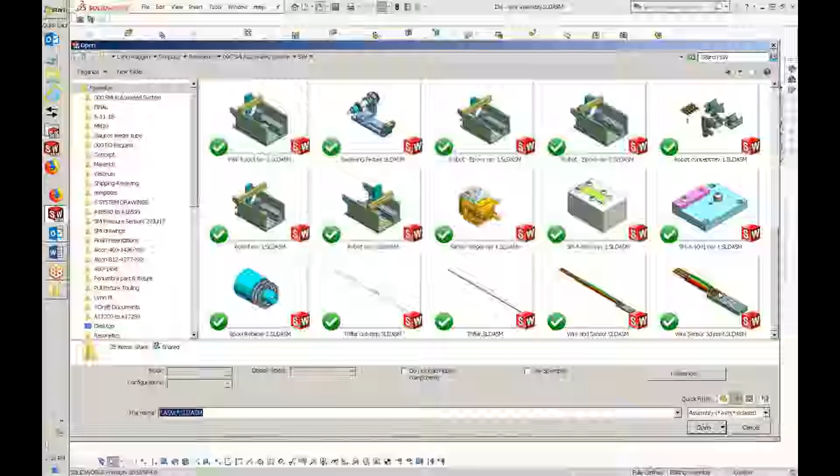How you doing? Oh, just marvelous. We're being paid. Yeah, I've got this on record, so let me get, I'm just trying to get Chris Robinson on the phone, but unfortunately I've got like no service. I don't know if I can go stand outside.

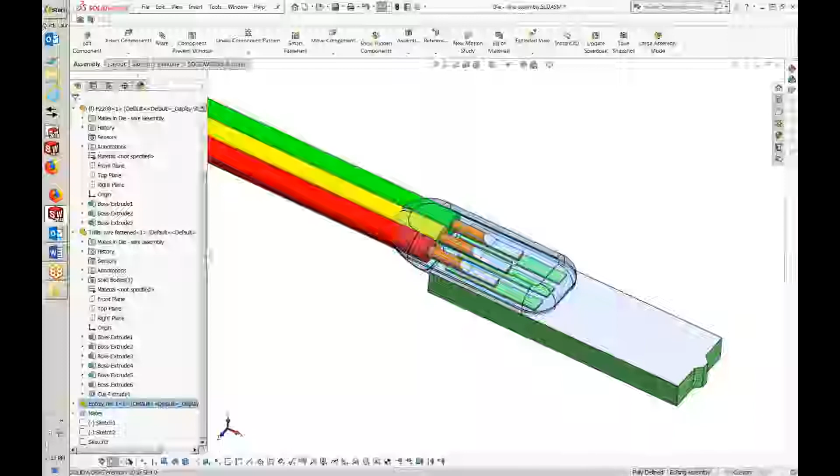Just locked himself out. Oh, yeah. Oh, he went out in the lobby.

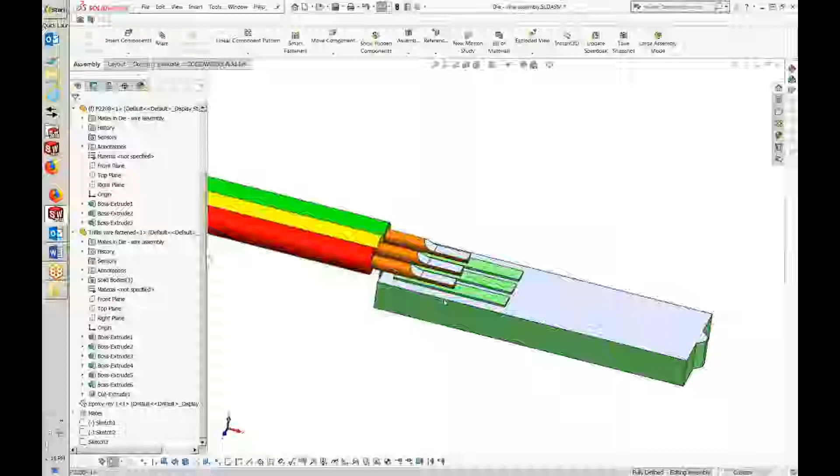Hopefully I can describe what we need, what we have, what works, what we can do, and what I need you to do. I'm guessing most of you have seen the product, which is what I have on my screen right here. This is the silicon sensor with the platinum bond pads.

That is 220 microns wide across there. The 48 gauge wire is 32 microns in diameter. So we have the trifilar wire that we need to laser strip, cut, bond, and then encapsulate that with the epoxy, and then, of course, cure the epoxy.

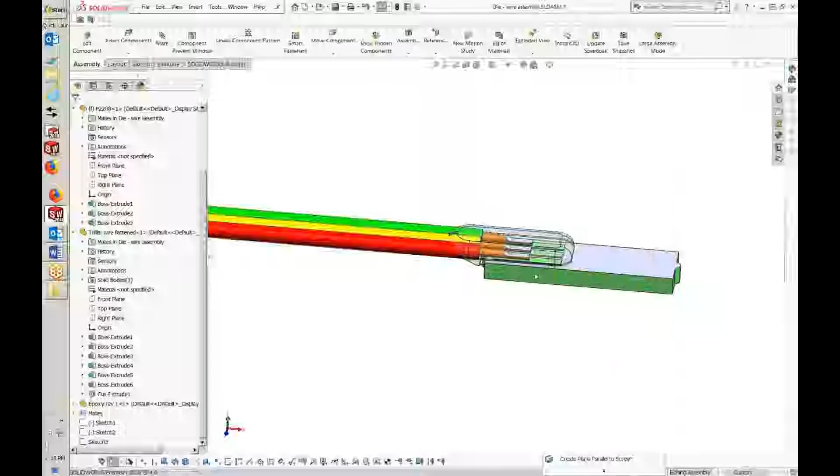After bonding to the sensor, before we do the epoxy apply, we need to do a cleaning operation. The best that I've come up with so far, and I still have research to do, is to take a laser and just lightly clean the area that's going to be bonded. Occasionally there's some organics that get on this part. I've tried different cleaning methods, but it is so small that if we use any liquid, that becomes a problem.

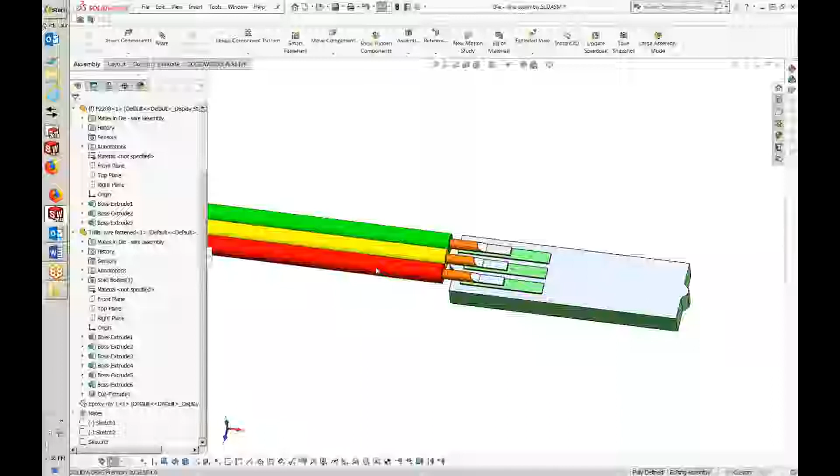Because you have to make sure that you get rid of that liquid before you put the epoxy on. It is a polyurethane 180 insulation on the wires, and this is about 3/4 of a millimeter long. It is 0.003 of an inch thick, or 70 microns.

Now, if I go to the wire itself, imagine that a wire is being paid off on the right side, it comes from a spool, goes through my tooling, which I will show you. Then in the laser stripping and cutting area, it's held and secured on the right side and on the left side, and this portion spans across the laser working area.

So from the bottom and the top, I strip that wire. This is somewhat optional, but currently what I do is I strip the 10 millimeters, then I cut the wire, and then I come back and strip this 0.2 millimeters, or 200 microns, of wire. The reason I do that is it tends to keep this more clean rather than stripping the whole thing and then doing the cutting. If I do that, it tends to have a little bit more debris on that wire.

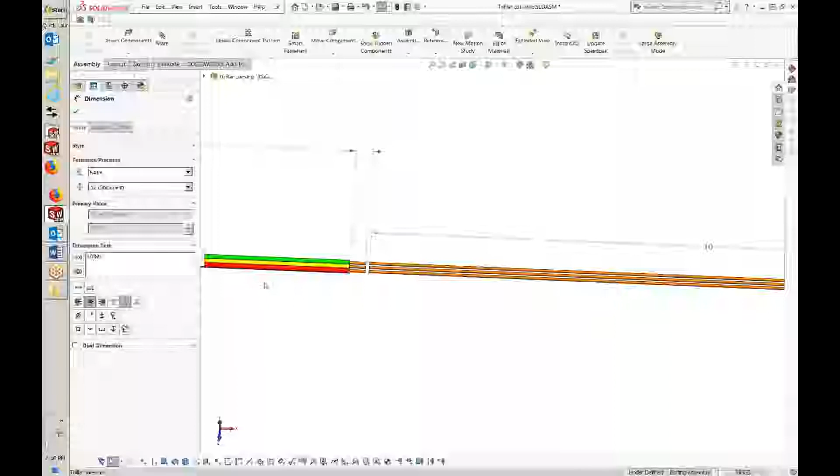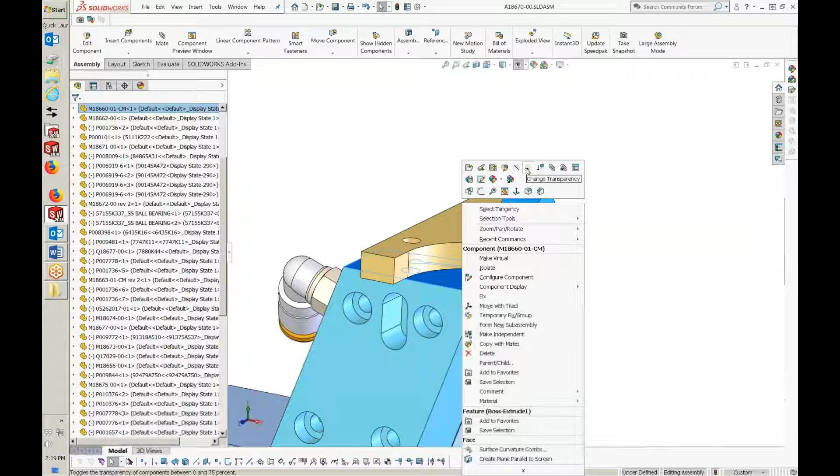My current tooling has a flipper on the top that I close, but let me change the transparency here, and you can see that I have a ported area, and I'm pulling vacuum, which holds that wire down. Now, the wire is obviously a lot longer than what I have shown here. What I'm currently doing is on this area here, I have ported argon gas. So once I strip this end, it is encapsulated with argon before I bond it to that sensor.

Now, let me go to the system, and I'll show you our current system now. I think maybe some or all have seen the video that Steve has taken when he was here.

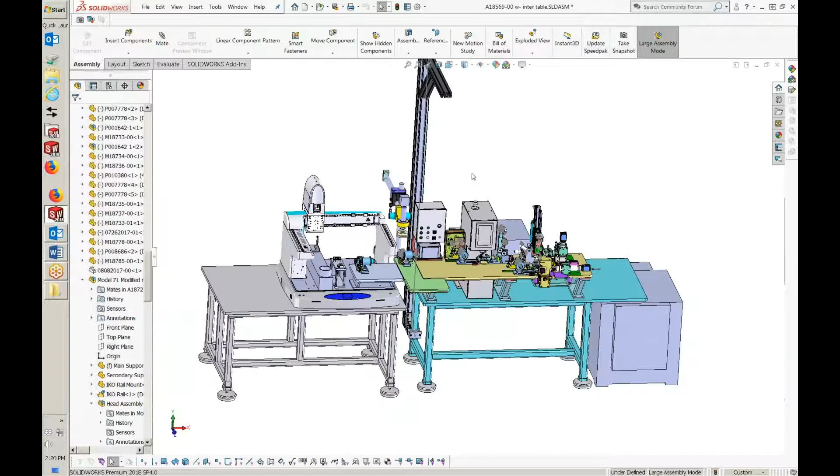Our current system consists of the laser, and I show the carrier in multiple locations. We actually have 2 carriers. I have an umbilical cord that hangs from the top, and that carries vacuum and argon to each of the 2 carriers. I have my laser station here.

Let me bring up my despooling method. This is my supply spool here. Now, I'm currently in the process, wait a minute, I don't have, let me back out here. Don't have that.

Steve, this is a little bit different than what you saw. And yeah, a little bit.

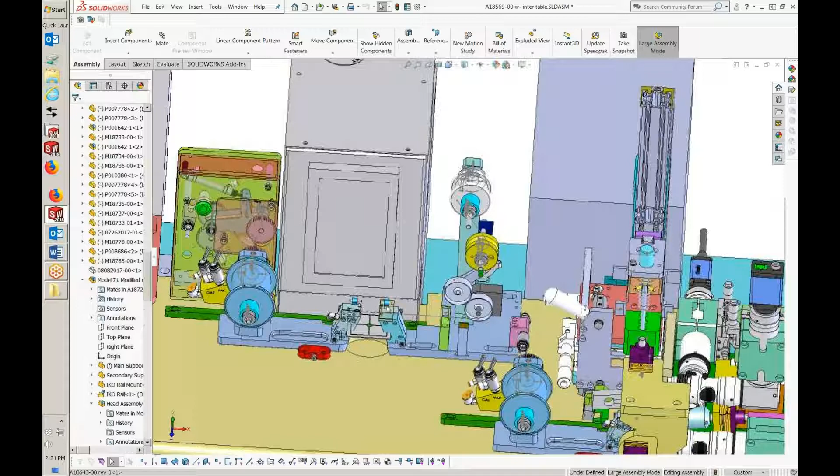What we currently do, we pay off the material, go through this V-shaped spool, and that is positioned down in line with this unit right here. The operator is responsible to flip those lids open, carry that wire through, close the lids, and there's vacuum that holds it in that channel, and then pull it to a given point, secure it to the spool, and then the spool winds X number of times depending on how we have it programmed to get the right length.

What I have in the works is, let me change my view for just a minute, makes it a little clearer. Okay, what I have here is I'm paying off my spool, I'm coming around here, and then I have a pinch roller and an encoder wheel.

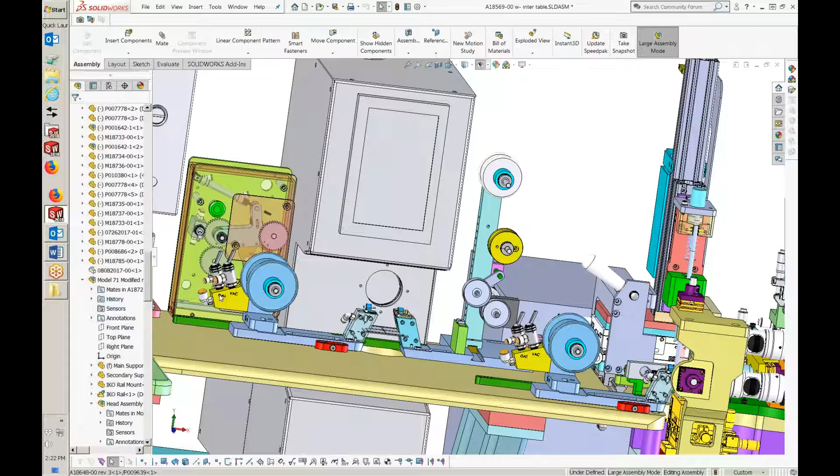So what I'm going to do in the future is measure my incoming material to this process rather than the outgoing material. So once I secure it to that spool, I'll still wrap my right number of turns, but I'm actually measuring the incoming material, so it's not dependent on the operator pulling it to a given point and securing it to that spool. That's a minor change, but something we have in the works, and I think it's going to be a much better approach in the future.

Here I simply have a wire guide that tends to guide it as I open this lid, manually grab that wire and pull it through.

Now, one of the things I want to talk about when we get into the automated system, right now, like I mentioned, the operator is picking up that wire, carrying it through, and securing it to that spool. I'm quite optimistic, but I'm open to whatever you guys think too, to use a robot to pick that up.

Keep in mind, these carriers can certainly change in configuration. This spool could be above or below this incoming wire. It could be positioned vertical. So just keep in mind there are other design options as we go to the automated system. But I think that we could use a robot to pull that wire.

The one thing I'm not as confident of, and I hope we can maybe work through an automated way to apply tape. Currently, our customer prefers taping the wire to that spool. It then wraps up, and then once we're done, we end up taping the other end to the spool as well, and we ship the spool and the product to our customer.

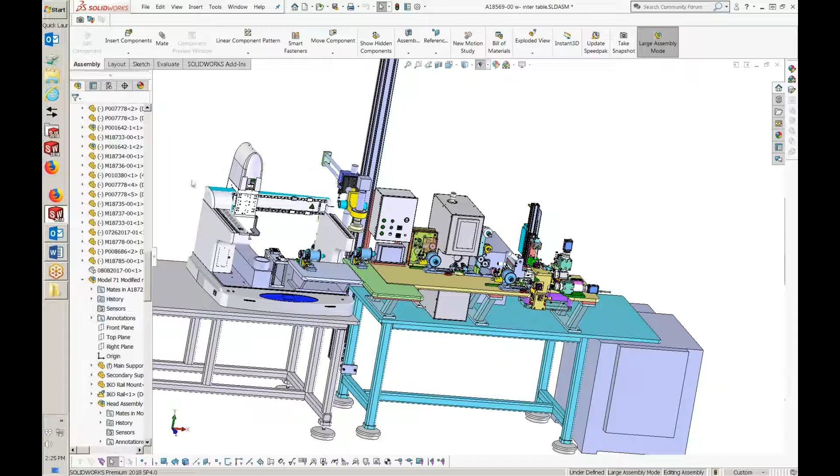So that's my laser stripping method, and I have the wire then wrapped on the spool and extending a short amount off to the right end of this carrier. While that's occurring, this is an Air-Vac system. I don't know if you guys are familiar with the brand Air-Vac. We bought that as a demo unit, and it included, I don't have all the details shown in this view, but it included the pick and place unit and the epoxy dispense unit.

I have added this tooling, and what we're doing at this point is picking and placing, or picking from a gel pack. Each gel pack has 100 parts on it, and that is different than what we're going to do on the automated system. The automated system needs to have a wafer feeder and will feed directly from the wafer. Currently, our customer is picking from the wafer, doing inspection on these parts, and then shipping the parts to us on that gel pack.

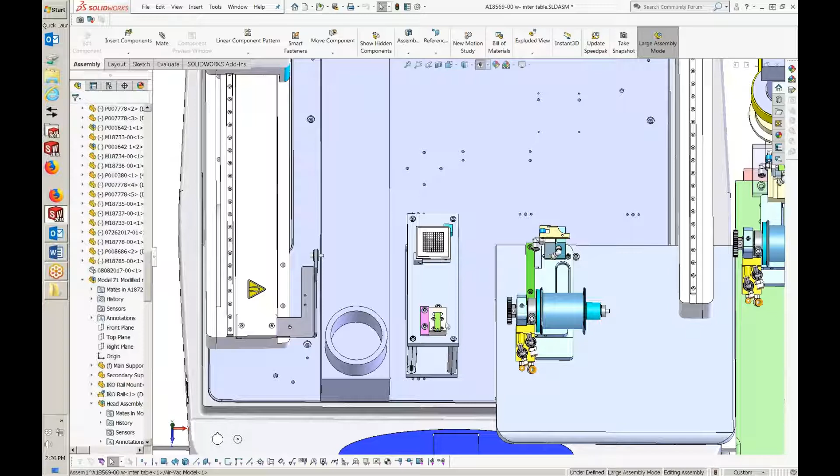I take one part at a time from that gel pack and put it into this movable fixture block for my sensor. So this portion here, I moved between the pick and place unit. I actually have two of those. Let me back out here a minute. And over here in the bonding station, I have another one of those. So I'm bonding a part here while I'm loading a new sensor to the fixture block here.

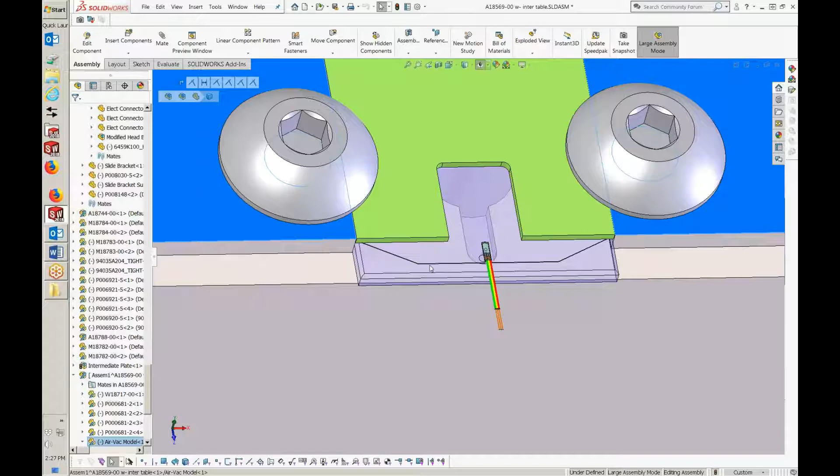And this fixture block is simply a machined piece of aluminum. This piece here that is shown transparent is a 20 thousandths gauge block. I then have laser drilled a hole through that 20 thousandths gauge block. That is in turn open to a pocket in the aluminum to draw vacuum. You can see that I have a small vacuum hole that's pulling that sensor down. That's about a 6 thou hole.

So imagine the wire is not there. I simply have the sensor now in this pocket. What I have on top of that gauge block is a 2 thousandths piece of shim stock. I have laser machined the opening in that, so it's a slip fit for that sensor to drop it in that opening. It doesn't need to be absolutely exact, it just needs to hold it in position. In turn, I just simply have a hold down on the top of that, another piece of shim stock, and then I have it all encapsulated in that block.

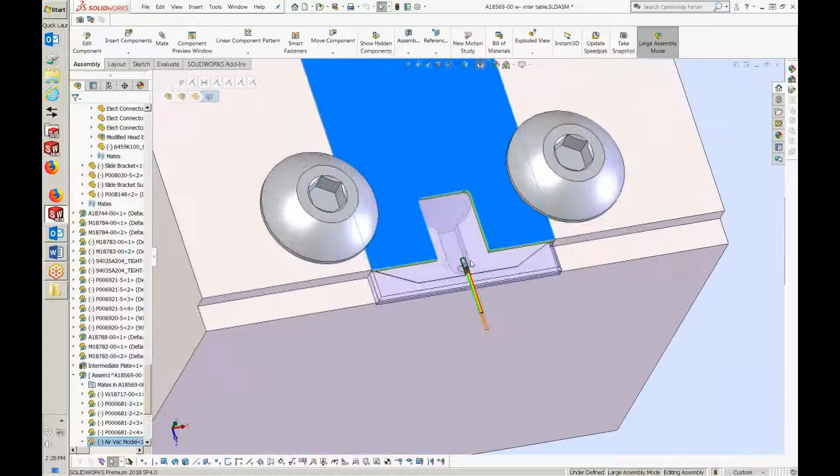Keep in mind that as we move toward the automated system, the physical outside dimensions can all change. I think this works quite well. And keep in mind too that we have worked enough with this. I know what works. I know what we can do. I think it all makes sense if we provide the part contact tooling, or we can talk about that. So this is picking and placing a sensor in that location while I'm doing my laser stripping. Let me move over here to the bonding area.

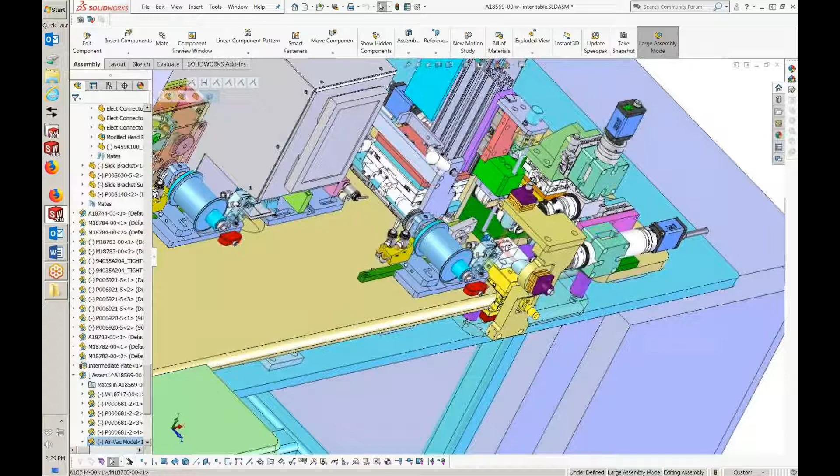When I move this carrier into position, I have a guide block over here and I have a dowel pin that holds it in a given position. The operator is responsible to push it into that position, and then I have a vacuum pocket on the bottom that turns on and holds that securely. I have the same vacuum source over here at this station, so once you move it into position, that vacuum holds it down and it does a very good job of securing it.

When I move this sensor carrier block from the pick and place unit to the bonding area, it again has a vacuum source and it holds the block down and continues to hold that sensor.

Ed, I'm sorry, Lynn, can I interrupt you for just one second? You're showing all the cameras in that view as well. Is the red path the field of view? Say it one more time. You show some cameras, and it looks like you're kind of projecting light and a field of view. Is that what the red path, the pink path is? It is. Okay, I wanted Brian to see that. He's our vision expert. I wanted him to see that you're looking at that from 3 different directions. Yep, I can see what you're doing.

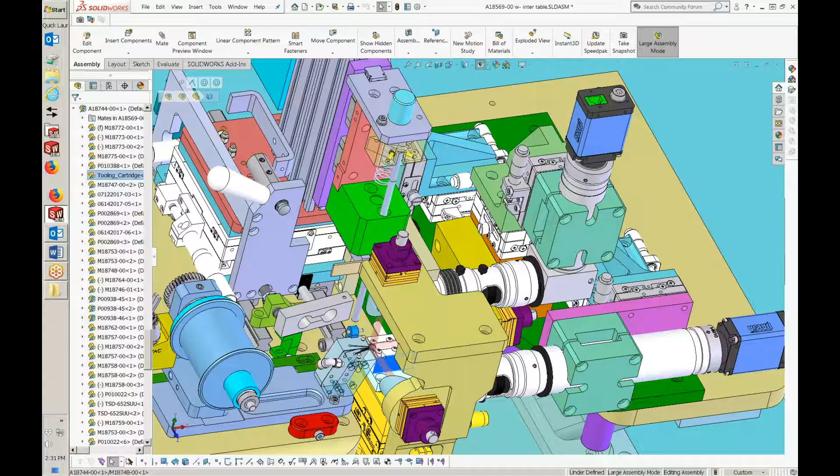And by the way, that sensor, as I put it in the end of that block and I carry that block from the other station back to this station, I have not had any problem with that part staying there. I've even dropped a block on the floor and it is a rubber pad and the part did not come out. The only thing that knocks that out very easily: there's a pocket in the bottom of this that I use for vacuum. If you set that block onto a flat plate, there's a little bit of airflow up through that hole and it'll blow that sensor completely out of there. Just setting it down. Simple hydraulics. Yes, yes.

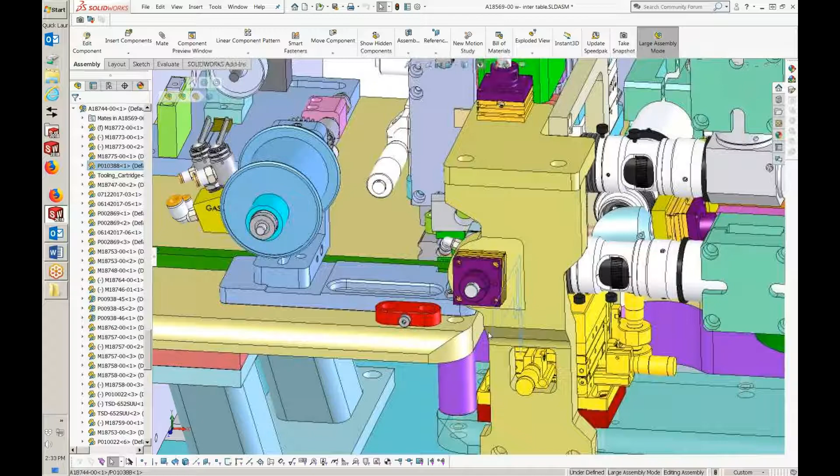What I have here is XYZ Thorlabs stages. So I can adjust that up, and X and Y here to move. In this scenario, I'm bringing the wire into a given fixed position because I've had the same locators on my carrier over in the laser area. I now bring it over here, so that wire runs very consistent as far as the location. The position of the sensor in the block varies a little bit, and I always bring it in with this down, so I don't hit it when I bring in the wire. And then I bring it up and align the sensor to the wire.

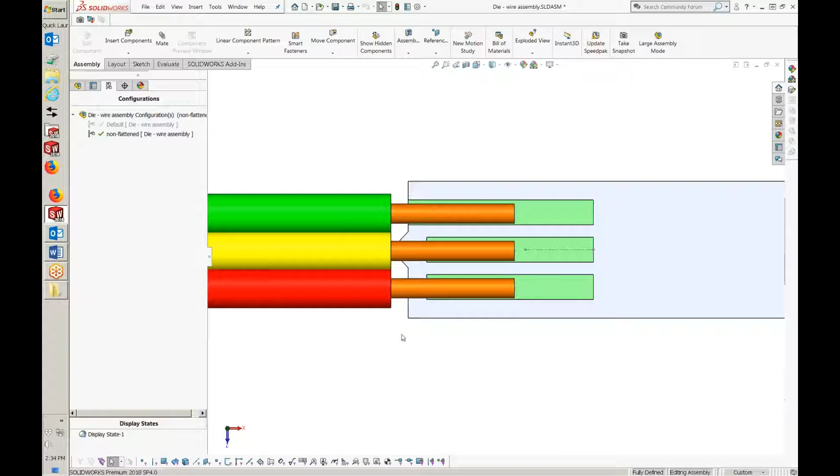Let me go back. So in my field of view from the top, I'm looking at that, and this part right now is shown 2 microns out of position. So you can see what that looks like at 2 microns out. And that is probably the most critical. I look at it also from the side with the camera, but that's where I simply bring the sensor up to the bottom of the wire. I also look in the end.

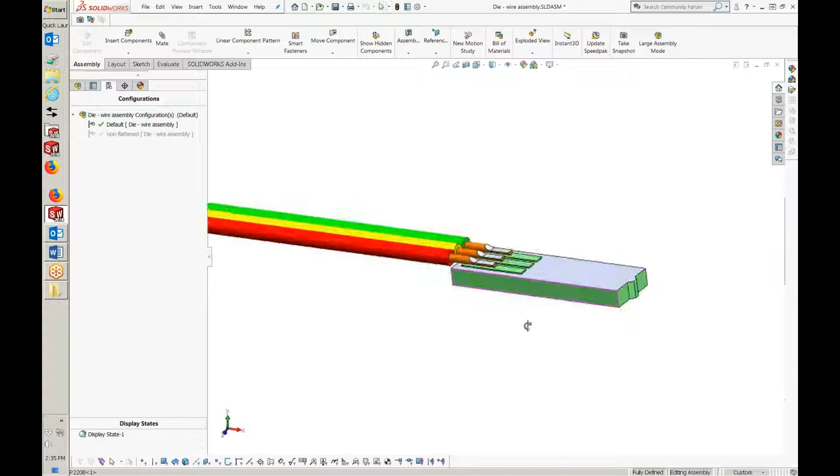The end I don't use very much for aligning the wire to the sensor. What I do use the other two a lot for is electrode alignment. When I bring the electrode in to do the bonding, I cannot see it from the top, because when I move that into position, I've blocked my top camera. So in this view is where I see the profile of that thermode. Also on the end. Now the thermode is considerably wider than that bond, so very seldom do I need to make an adjustment side to side. That usually is very good in its location. It's pretty much the same, but not quite as robust from the side here.

Because my wire is fixed on the location when I cut it in the laser, I bring it over to the same locator. It's typically very repeatable as far as where the end of that wire is and where my thermode is. So what I'm doing in my current scenario is adjusting the sensor up, down, back and forth, and in and out to get it aligned. But then the thermode is independent of that, but it seems to be very consistent with the wire.

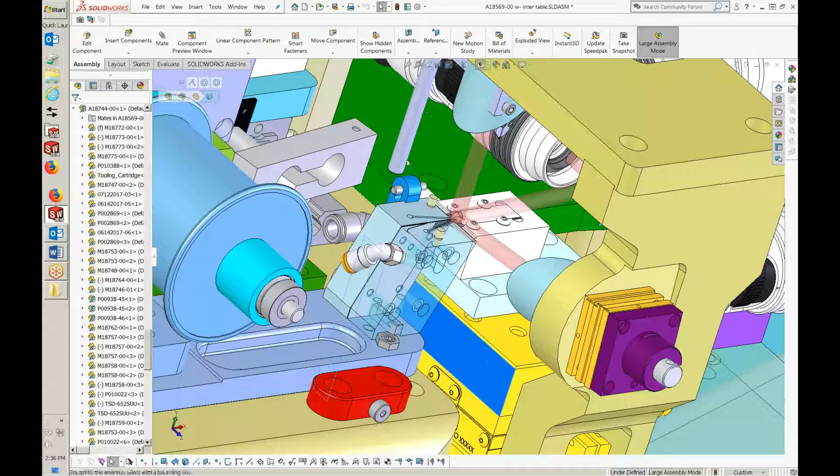Lynn, from a process question over here at EF, is that a heated base? I think the answer is no, but you tell me. That is no. It is not a heated base, and the bonder itself, it's a thermal compression bond, and I don't have all these views. They're not exactly the way they should be shown, but what I have tucked in all this bunch of stuff is a Miyachi bonder, and the Miyachi weld head or bonder head. I don't show the power supply, and the power supply seems to have worked out very well.

The actual thermode we have developed here at Resonetics. I was having trouble with that, and it's such a tiny bond, and we are bonding all three at the same time. I did some work on that. Anyway, I've come up with a very good electrode on the end of that. Now, it's not really an electrode, I call it that sometimes, but it's a thermode.

This is our assembly where we're doing the bond, where I'm bringing in the bonder. So this is on a slide so that the head is out of the way and I can see it from the top to do my XY alignment, wire to the sensor. I now bring this unit in, and I don't know if you're familiar with the Model 71 Miyachi head, but it's modified considerably, but that's what that is.

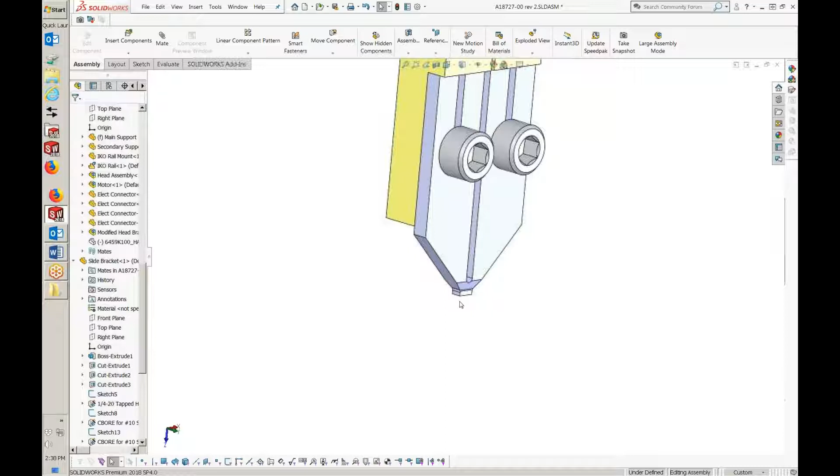Great. Lynn, is that a pulse tip, or are you storing the heat in the thermode and then bringing it down with no heat, allowing it to transfer? I bring it down with no heat, and when it comes down and does the bond, it's very similar to a resistance weld where it comes down. Yes, so it is a pulse tip. It'll be at stasis by the time the joint is made. Just so when it comes down, then it puts the heat in.

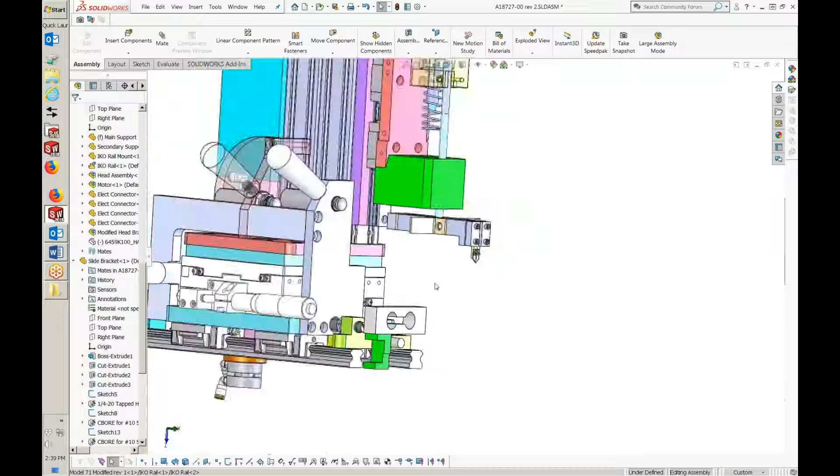One more time. So when you come down, you make the compression at about 10 grams, and then you energize. Is that what you're doing? That is correct. There is a switch that's not shown on this view, but there's a switch built into that Miyachi head. And when this unit comes on down by means of that servo motor, it makes that switch. It stops the downward motion because now it has preloaded that spring, and it triggers the electric circuit to run the current through that.

You can program in a delay, and then of course you program in the ramp up, the bond time, and the ramp down. 10 grams. That's the strain block right there. So they drive down until they see 10 grams before it stops? Yes, that's correct.

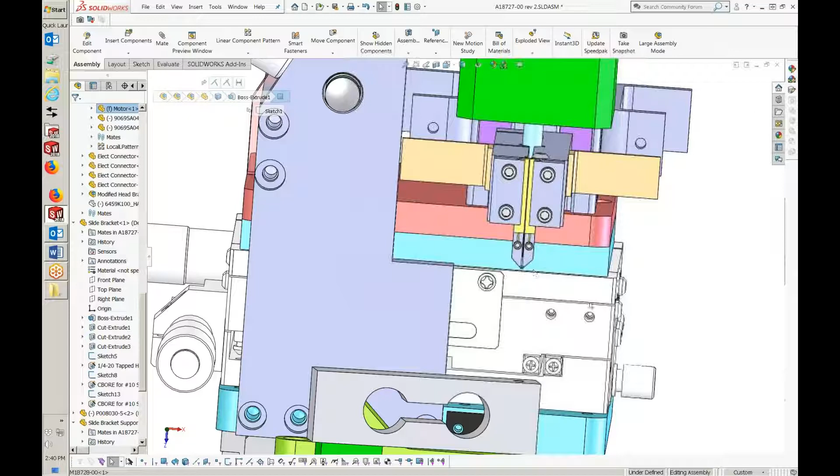Now, this portion down here is the Resonetics portion. We just bought these two slides, Thorlabs slides, which give us the adjustment side to side, so I can align that with the wire also in the other direction. I can align that, and again, that doesn't need adjustment very often. I have a handheld handle here and a push button here. That releases the lock, allowing this assembly to move forward and back.

Now, I have never liked this head very well, and here is the reason. And by the way, I'm running about 220 grams of force on that thermode. You can see with this design, and forget about this shaft up here, this comes up with two bearings up into this unit, and that is the means that guides this unit as it floats up and down. And then this spring in turn pushes this down, and you adjust that for the amount of force you want. With that cantilevered distance here, and because it is so small, any motion in this direction causes me problems.

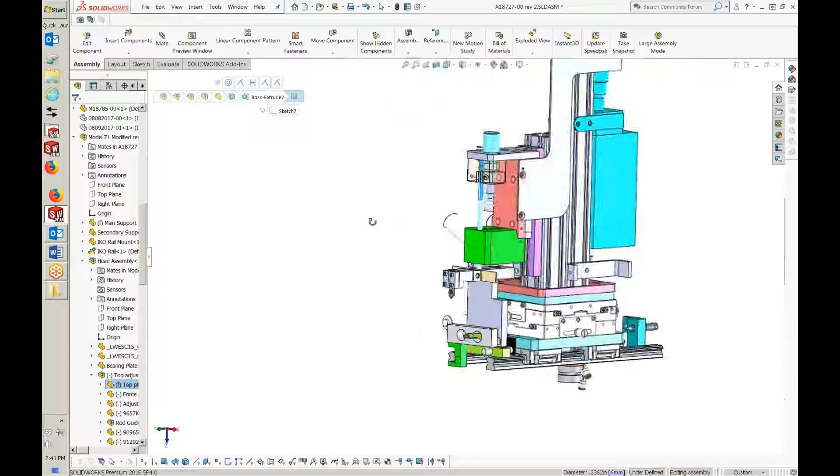So after I put this in operation, I actually ended up making a longer shaft for here. I put a couple bearings in here and preloaded it. So it still has free motion, but it tends to help as far as any cantilever motion that is moving out.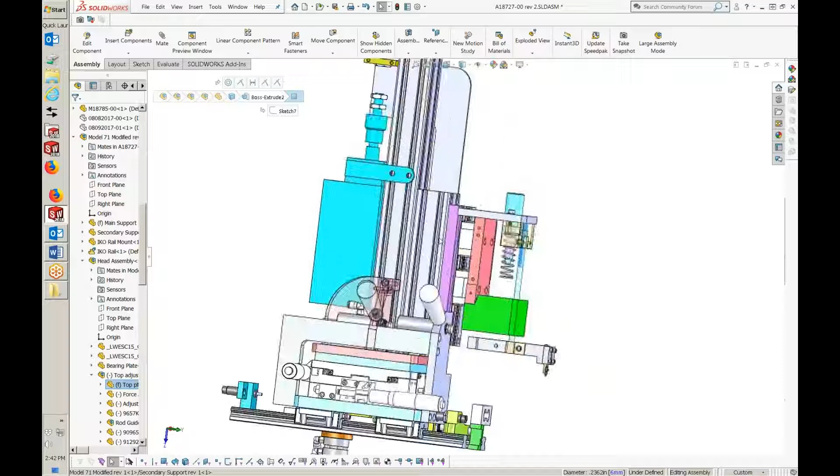The Miyachi, this Model 71, I don't think it was ever intended for something this small. And the way you adjust that is on the controller. You can adjust your post-stop or your pre-stop before the weld. So you bring that down to X distance above the part, and then you can come on down and do the weld. That is way too coarse, and I can't get to the exact position that I'd like to get to. So when I go forward, I don't want to use a Miyachi head. The power supply is perfectly fine. Haven't had a bit of trouble with that.

But the motion, all I really need to do is to come over and put a very consistent force on that part and make sure I don't move side to side, back or forward when I come down with that force. It needs to be very consistent on the top of that part. Once I'm down, I need to know that with a given force and then trigger the electrical circuit. So, any questions on what I'm doing there?

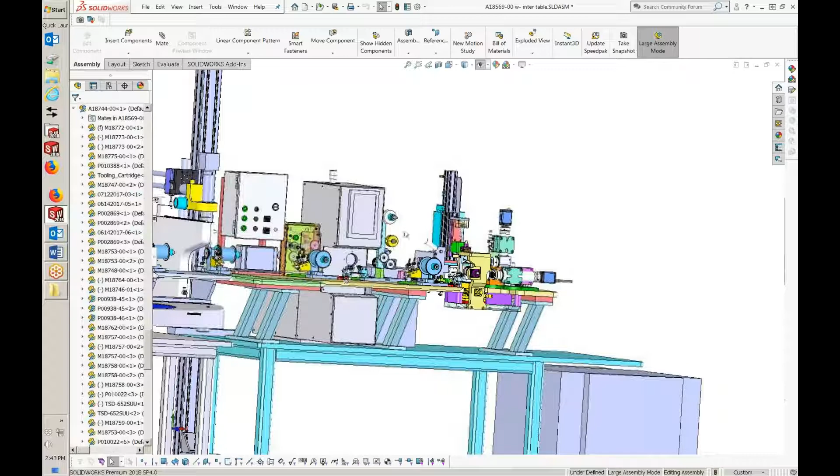Not yet. Have you thought about, instead of using shaft guidance on there, using cross rollers on the bond head? Instead of using what? Well, right now it looks like you got a shaft bearing out there. There is a linear bearing in here that came with the Miyachi unit, and that's what I'm using right now to guide that thing. I've thought about trying to go with something.

I'm a little concerned. It's a balance between, if I have much preload, that'll give me more rigidity, but it also provides less accuracy on the force because then you have to overcome the preloaded bearing. You get the weight of the carriage, which is going to work against you, but worse yet, on the bearings, you're going to get your stiffness, but you're going to get the stiction of the bearing, which will false read on your grams force. Huge.

And if we can work another way around this camera, all I want to do is put some force on there. So as long as I can get it into position and put a consistent force, I could even make a U-shaped bracket, something like that, some method that I can put the force directly over the bond. I think there's many ways that I could keep that accurately positioned.

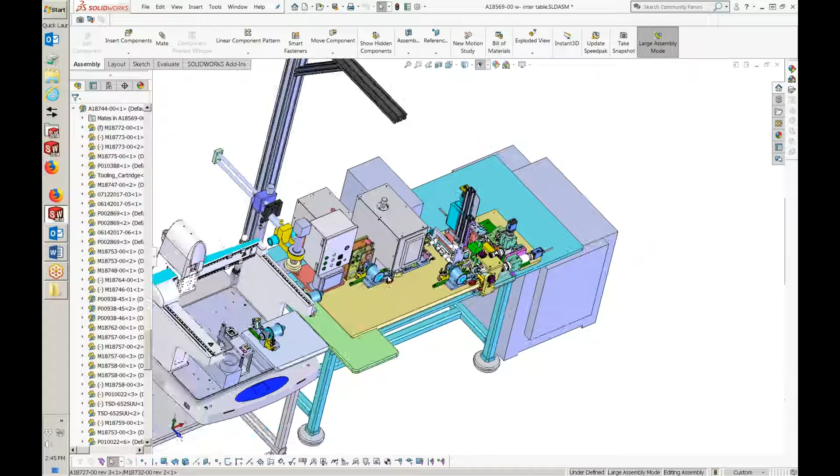Now, what I had them do is build in also a load cell on here so I can check my force anytime I want, simply move it back in the park position. Load cell. That's what I would recommend. And bring it down. If you want to make that as stiff as you need, what I'll do is tell the servo to stop at 230 grams of holding force, whatever it is.

Now, the last step, and what I have here is simply an inspection station. So whether it's cutting it off, bonding, or the epoxy station, I can bring it over here and snap an image, look at an image of my part. That was kind of an afterthought, and it worked out real well. I spread this apart and put this cable in here. It doesn't look the greatest, but it works functionally. And also you have these two carriers and they have an umbilical cord on, so you got to make sure they don't get tangled.

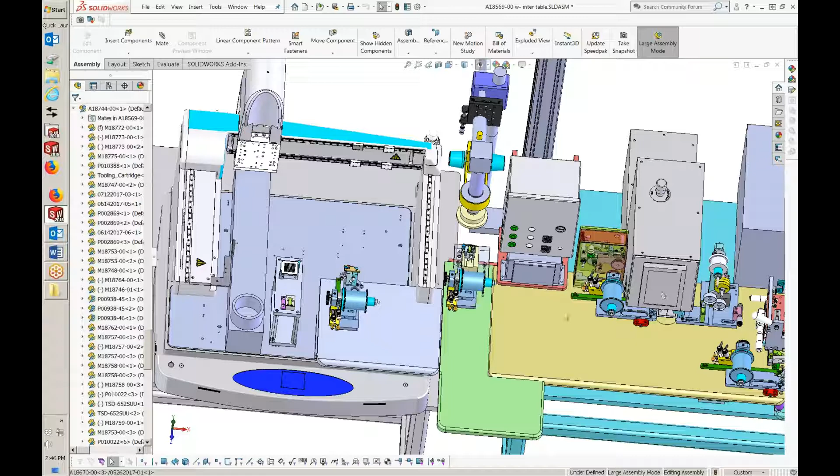Now, the last thing I do then is bring this over and dock it in the air vac station again. Again, vacuum holds that part down. And I don't have all the details shown in this view, but I bring that over and the head is equipped with a dispense nozzle. It looks at it first with the vision system to find it. It then brings it over and deposits the epoxy on that.

It then brings the camera back and looks at it a second time. It then moves, and what we've added to this air vac system, and again, I don't show the detail in this view, is a UV light guide that I have mounted on that, and it comes over and does the curing.

Once that is cured, I again look and do a final inspection on that part, and then I'm complete. I take that spool off of that curing. The product is the part rolled up on the spool, the little tooth tape holding it. Well, you saw that. I brought that in.

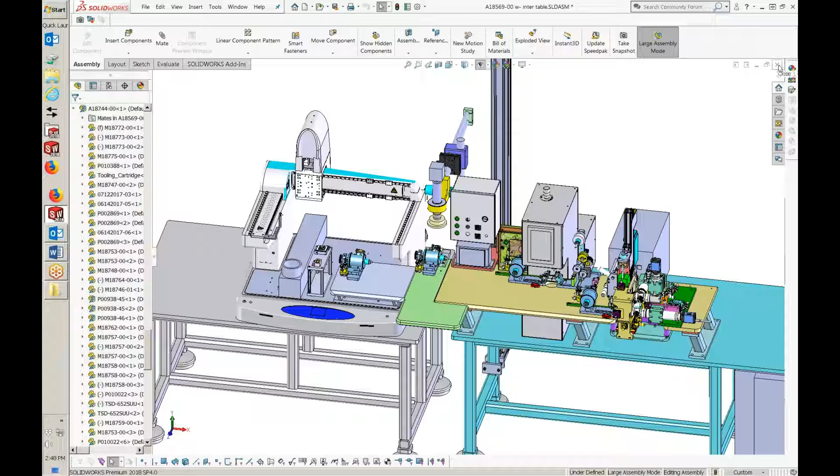Now, that is the semi-automated system, and the customer would like to go to a fully automated system. They do expect production rates to go up considerably. So let me bring up some concepts on that. Close this out because that is a big file.

I've got several concepts that I've worked with, some as an index dial type system. The one that I think will make the most sense is maybe a robot to move the carrier around from station to station.

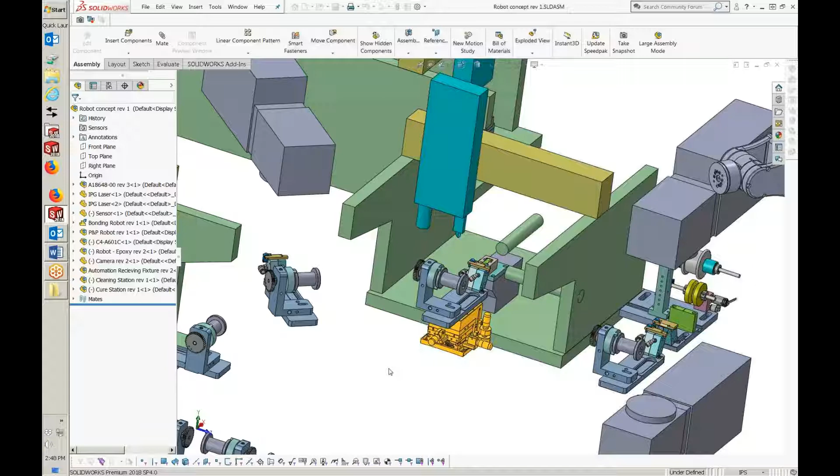And I'm going to stay on the line, but I'm going to go get me some water if you don't mind. I ran out of water. Oh, feel free. I'm doing a lot of talking here. Excuse me. Okay, I'm back.

Okay, what I have shown here is my incoming spool dispenser and my carrier. And again, keep in mind that this can change configuration. So if I could use a robot, would be great. Pull that wire through there and get it secured to that spool. I realize that maybe to start out, or if everybody is not comfortable with doing that automatically as far as taping that, I may have to have an operator interface there.

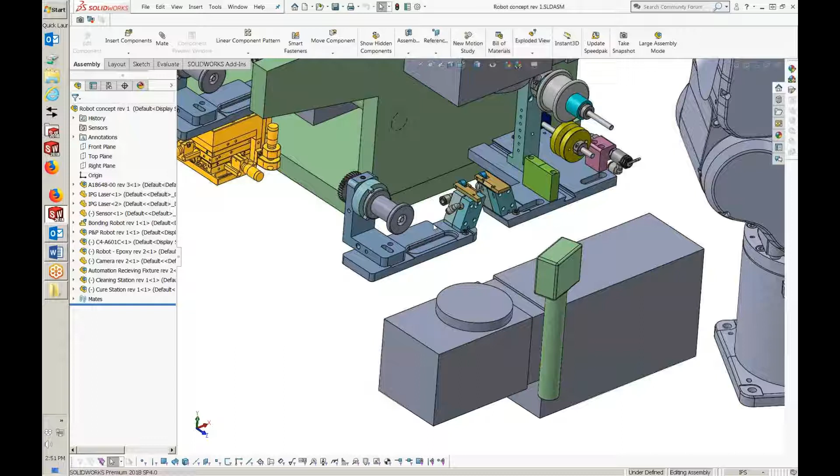A good alternative. You sent a lot of information over, and I know they're digesting. They're going to get back to us and see if we've got some other way to streamline that as well. But yeah, for now, we'll just think of it as a laser stripping station, not with any particular brand on it. Okay. You're showing it as a dual galvo system, top and bottom, correct? I am, and that's what we have now, except that it's got a beam splitter. It's one source. Okay. So just consider that a laser. So yeah, we have a laser in it.

Now, as far as our current experience, when I dock my carrier, it does seem to be very repeatable. I'm guiding it along one edge and then coming to a stop on the front face of this area right here. And then the bottom side of these is hollowed out somewhat, so when I pull vacuum, I got plenty of surface area to pull vacuum on that. I'm not saying that's the way we have to do it, but that's the way we do it now.

Right now, we have a spool retainer over here that I simply stick on this side of that spool. It'd be nice maybe if I can stick that spool on, and maybe there's something that grips it on this side and leaves this exposed, but that's details further down. So kind of my thought here, and I'm open to a lot of different ideas, but if we could use a robot in here to move these around, we dock this here, and we have several of these carriers.

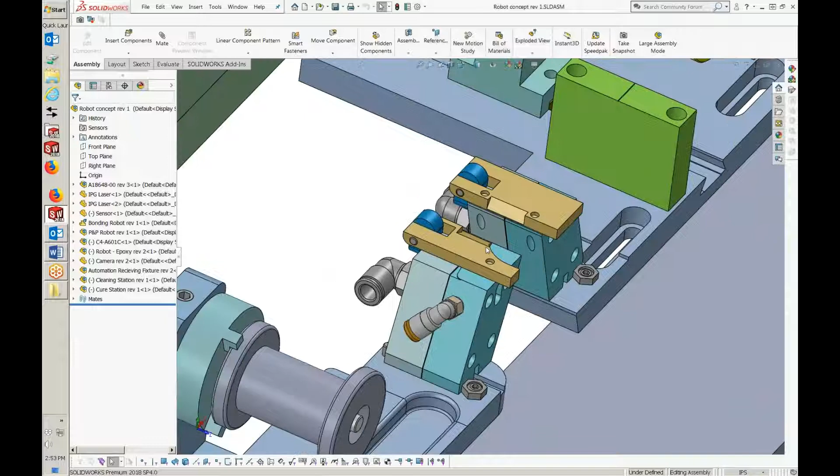The one thing that I haven't figured out exactly how to do yet is to keep the shield gas and the vacuum on that part until I go through the bonder. So here and here, I need to somehow continually have argon flow on the end of that part.

Now, just to throw this together, I showed here a separate pick-and-place unit that would place that sensor from a wafer to my fixture block for the sensor, and then maybe a separate pick-and-place. This could be configured quite a bit different. However, it would be great if, and I know there's people that make the wafer pickers. I mean, AirVac is one, they can pick directly from the wafer and go to a given point. Maybe you guys feel comfortable making that. Maybe you'd make them.

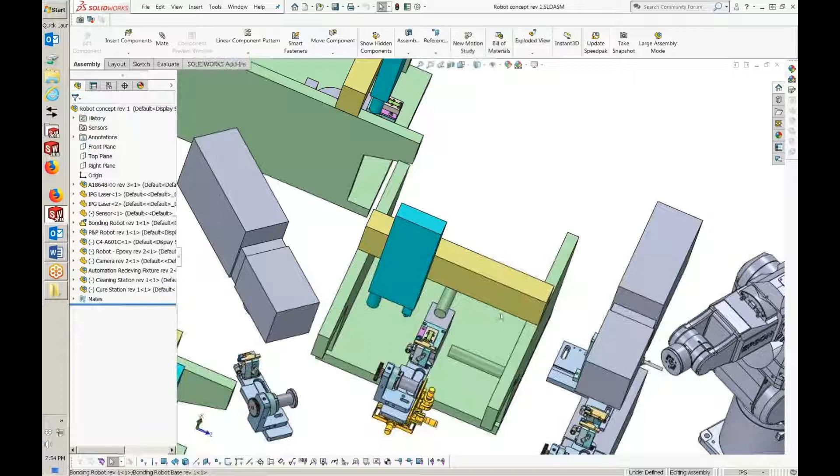I'm not certain on that. But if we had the pick and place right here, and we could pick it to a given fixed point that never moved, this unit would move back to pick up the next one, and part of this unit would be the bonder. So maybe you have a separate unit here, this one picking from a wafer, and then the bonder moves over and can bond right there at that position in this same station.

Now, the way I'm proposing here that's different than my other one, here I'm planning to move the wire and align it to the sensor versus aligning the sensor to the wire.

Now, if I was to do my bonding right here in the same pick-and-place unit, the one advantage could be that I've got a fixed point - I'm always coming to that same point and it never moves. But then I also have to have clearance to get vision in from the end and the side, so when I do my bonding I can see where my electrode or my thermode is.

Excuse me, this is Brian asking a quick question for you. How certain are you of the conductor-to-conductor spacing? Is there any uncertainty in the center-to-center pitch of those 48 gauge wires?

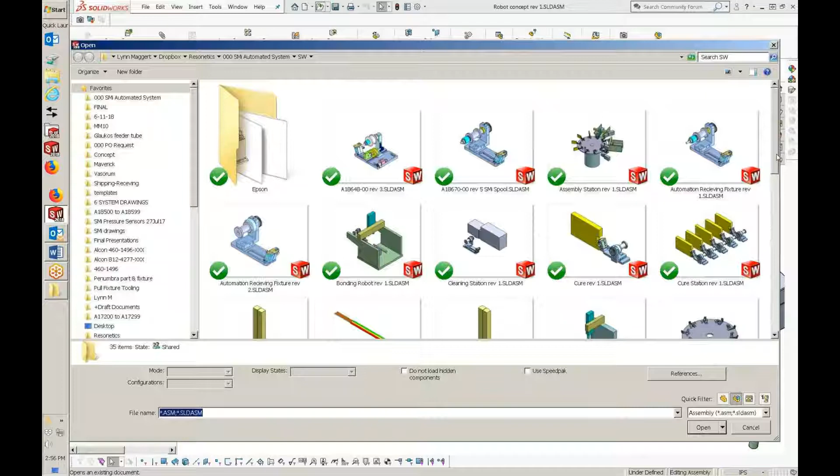Currently, the supplier of the wire - it's MWS who's supplying the wire at this point - and what our spec is, plus or minus 3 microns, an eighth of a thou. I don't have the right one here, let me open the other file.

But your question is, how accurate is the spacing on this wire? I am actually amazed at how consistent they are. Now, what I'm asking from you folks is, I realize there's going to be some variability on that, and what I would expect you to do is align the center wire to the center pad. Can't do any better than that.

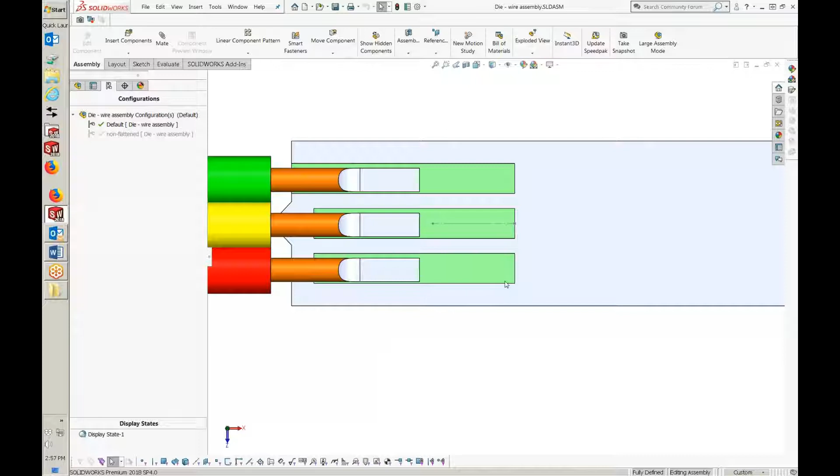Now, just for concept, I just dropped in my XYZ, but Steve, you and I have had some communication about the accuracy of the robot, so I would not expect the robot to position it accurately with that unit. All the robot would do is move it into a docking station, and then I'd have a very precise XYZ that coordinates with the vision system, so I can align the wire to the sensor.

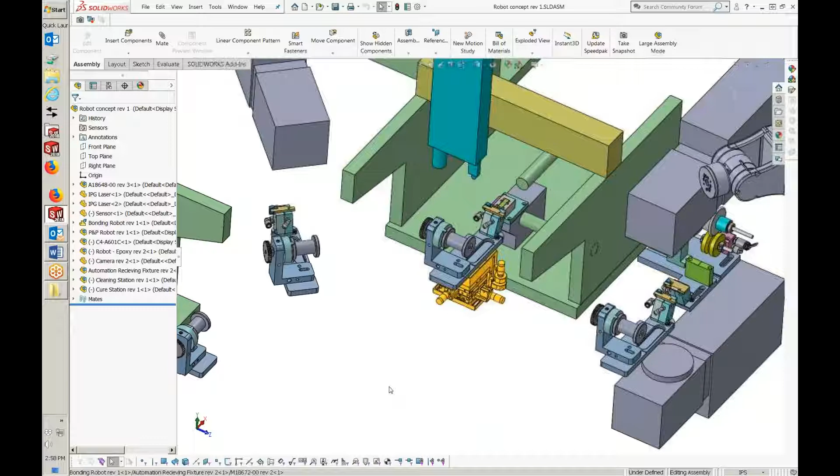From there, I no longer need to retain that argon flow across the end of the part. However, I am going to need to retain that vacuum, or I think that's going to move unless there's another good way to do that, which I don't know what it is yet.

This station would be the laser cleaning station. And Steve, like you talked on that laser, it does have through the lens viewing. So we're going to have some variability in where this is positioned left to right. A laser, as it cleans it, I would think it could swipe, do a pattern across this way, and I don't care - I can give it plenty of distance on the sides.

But forward, left to right, I don't want it getting into this insulation, I don't want it getting too far down here. So I will need to know where that part is so that I have a hatch area here that I do laser cleaning on. Good application of the vision integration on that laser. I understand, yes.

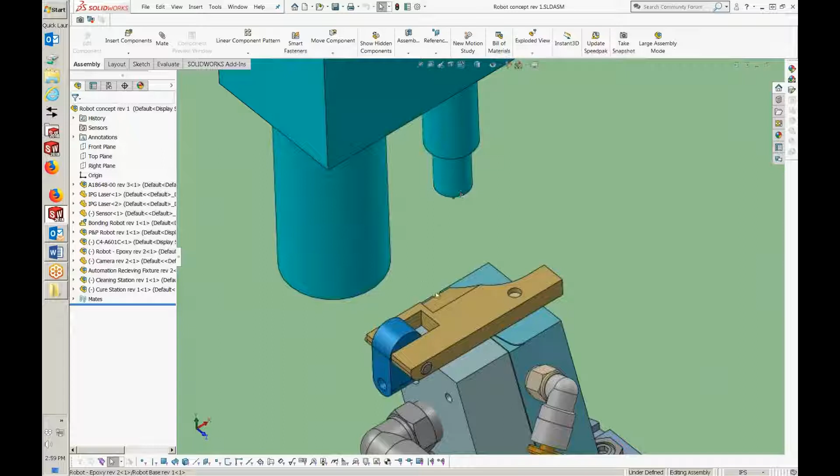Okay, this station then would be the epoxy dispense, and what I'm sure I'm going to have to do again is bring vision in to find the exact location of my part before I deposit that epoxy.

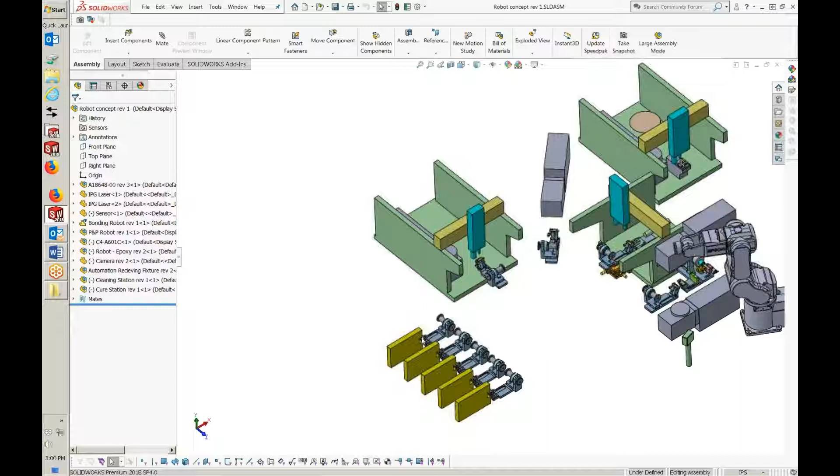Now, what I figure is once I put that epoxy on there, somewhere in this station, I need to have the UV light where I can at least do an initial cure once I deposit epoxy. From there, I probably don't even need the vacuum. It's probably secured enough in the end of that part. I've got to make sure of that.

But this is just one idea. I know that Mike, you sent me some information that there's an oven where maybe I could just put them on a conveyor and run them through. Actually, that's not the right term - it's not an oven, but a device that has the UV light where it will cure as it passes through. We would either build that or use multiple UV lights or a moving emission source.

But I think your cure time is pretty excessive for some reason. I would also look into that right away. The customer has asked for 2 minutes; currently we're using 45 seconds. I can't get Epo-Tek to give me an exact time, but I realize there are so many variables that make that up - how thick it is, the substrate, there's so many things that go into that.

And I don't claim to be an expert when it comes to epoxy. But the customer asked for 2 minutes. I think the only reason they did was because there's one document that says something about 2 minutes. It's the Epo-Tek OG116 epoxy.

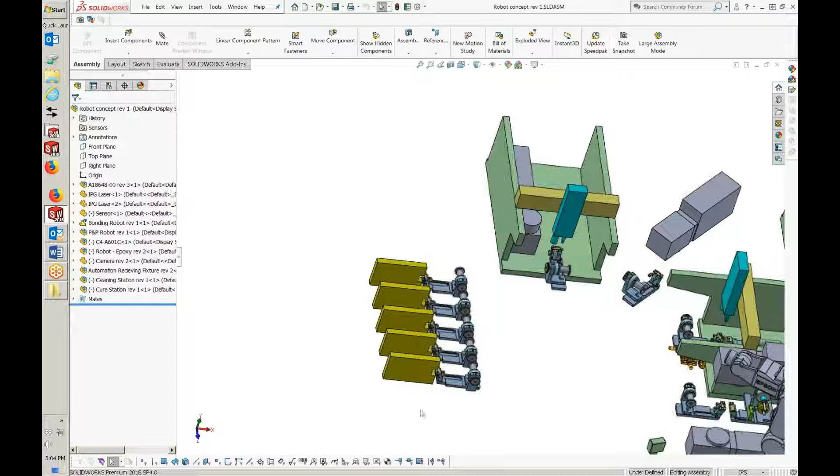But my thought here was, if we had a conveyor type system and we could flood the area with light, I could put it on one end, bring it out the other, and have multiples to get my extra time. Or the robot could pick and place one here, and then the next time place one here, and so on, so it always has enough time in the station, and then it ends up out in the final inspection area.

We have to do inspection, especially at the end. It probably would be a good idea to have an inspection area before we put the epoxy on it, and I want to capture those images and store them.

Now, one thing I need to do at the end is actually do the resistance check. Now, I have those 10 millimeter lengths of wire that are extending that have been stripped. They tend to tangle, and maybe there's a better way of doing that, but when you strip them, of course, it's adding heat to the process, and they tend to kind of tangle together somewhat.

Yeah, if there's a way to automatically do that, that would be great. But I'm certainly not counting on that - I still may need an operator there to take care of that part.

Now, one of my questions, and maybe you guys have any too, but with the alignment, how confident do you feel that you can do that with a vision system?

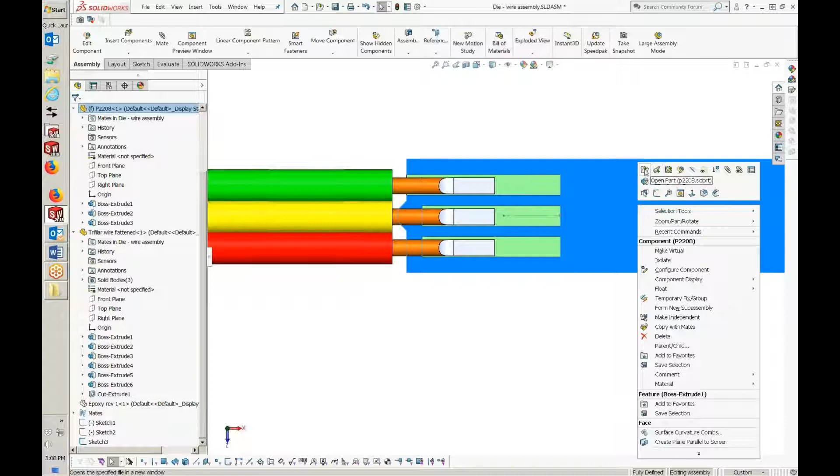And interpolate in between. I understand there's a lot of questions, but it's all there. It could be a microscope or a telescope, it's kind of the same problem, but we just have to mind our image quality.

And like you're saying, you need to map it. Maybe you can do that before the wire's in position, and then you could just use one of the bond pads, something like that. Now, what I'm talking about for mapping is just a matter of establishing calibration and traveling to a few known points and making certain we're all still.

And I am by no means a vision expert in any manner. The one we have out here, I know there's better lighting and better ways of doing that. It's just I don't have that skill set. They put it together up in Nashua. Getting time and getting the right people down here to help is a little bit of an issue. But I know it could be much crisper than what I have. It's probably mainly lighting, I'm guessing. I'm just not an expert in that area at all.

And it's a matter of going through your modulation functions and getting the lens and the light and everything working together, and that's what we do. We could certainly give you some direction in that way.

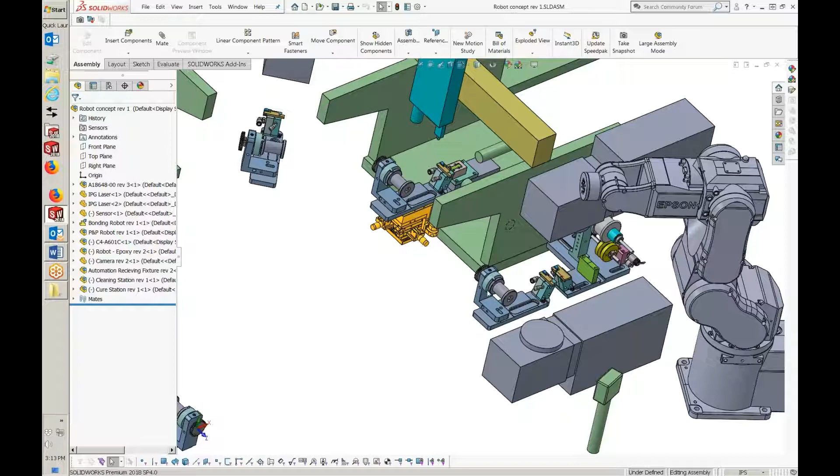Now, the other thing that concerns me, do you guys have any experience with dispensing tape? Yeah, that's a chief concern here too, because you can meter off a piece of tape, cut it to dimension, reach over, pick and place it. The issue isn't really the tape as much as it is trying to get the wire underneath the tape and everything to line up as you're taping that edge down. I think it could require some discovery, but it's not unlike what is being done in the circuit board industry, where they're dispensing a small adhesive label, picking and placing it onto the circuit board, right, Mike?

Thought Mike Young might still be with us. Yeah. Okay. Maybe.

And as far as the wire, let me tell you this: we do have some amount of braking on this so that it doesn't freewheel when we dispense the wire. In addition to that, we have vacuum that's pulling it down through here, and we have vacuum that's pulling it down through here. And I realize these lids are going to be different. They're going to be automated, or whatever, if we need them at all.

But anyway, once we pull that through that area, you have some amount of tension in the wire, so you have some control. So I can bring it up and touch the bottom tangent to the bottom of that spool or the top or whatever. And then I think that I could control it pretty good, put a piece of tape on it. But again, I've never done that. I don't know.

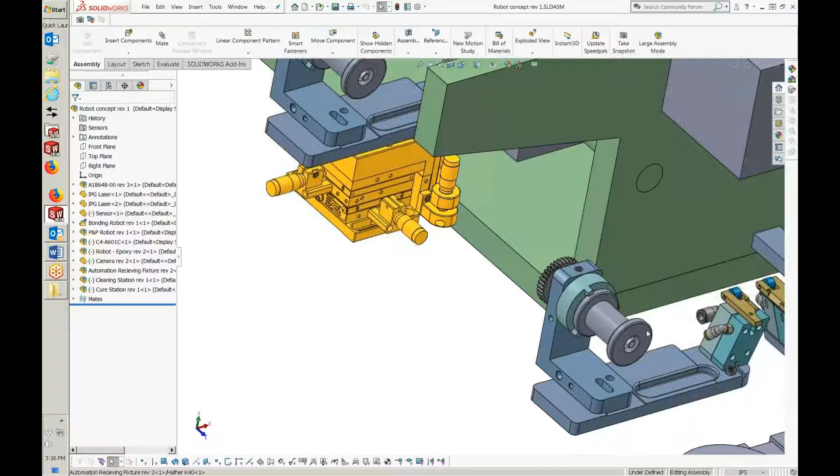Lynn, if I could back up just a little bit, I think you were talking about doing an inspection prior to the epoxy being applied. Was that just a geometric inspection, just making certain that the dimensions are right and that your components are all lined up and secure? Or was there some cleaning aspect in the inspection as well?

After the cleaning, yes, I would like to gather that information, but also inspect for debris on that. Right, debris, okay. Any ideas on the specs on the debris? No. Really small. Visually, we see it on screen now, and I don't have a spec on it. Yeah, understood. It's just one of those things.

We'll have a high magnification for the alignment portion. Maybe there's a similar order of magnitude there for debris as well. Yes, and it's really only looking at it from the top. I only need to look at it from the top at that point. Right. Okay, very good. Thank you.

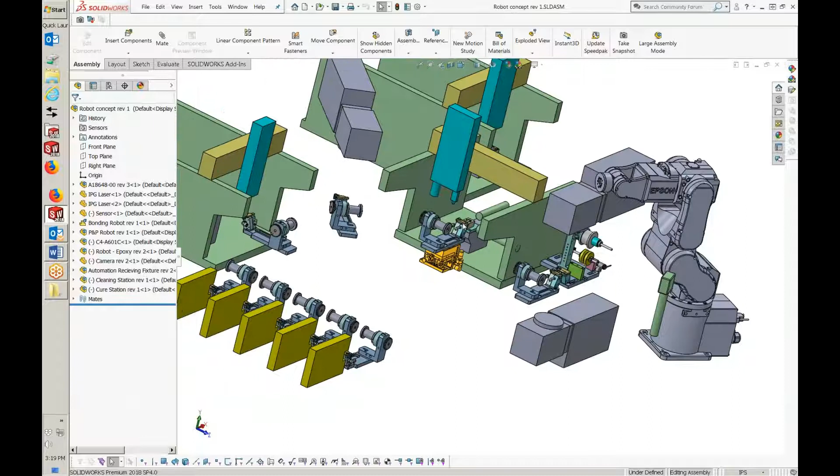Right now we're taking, I think, about 20 seconds to do the stripping on that wire. I don't know if it has to be there. I think if it was optimized, maybe with that other laser, it could be faster than that. The bonding, obviously, only takes a second or two. We have to have time, of course, to get everything lined up and in position and exchanged.

The laser cleaning I wouldn't think would take very long. The epoxy, I wouldn't think. And we can adjust how this is cured to accommodate pretty much whatever cycle time. So I would like you to focus on what you think is reasonably fast. I would certainly hope it's not more than 30 seconds, but it would be great if we can do under 30.

We'll have to do some sort of time study on this and then look at the number of stations, because obviously if you start duplicating stations, you can increase throughput. But that's your dollar spike, where you say, now I need 2 sets of laser strippers or 2 sets of cleaners, which are expensive solutions.

It almost appeared that it's not too far out of line as far as my timing right now, my laser time, and then by the time I pick and place a sensor and put this in position and then do the bonding and laser stripping, that's a piece of cake. That shouldn't take long at all, although I haven't done development, so I shouldn't say that until I do it.

What happens with the residuals from laser stripping and from laser cleaning? On the laser stripping and cutting, there is a vacuum source connected to that system. It's a fume eliminator system, so it tends to pull off any of that debris, and we will need that. And laser cleaning? I haven't given that a lot of thought because I'm not doing it yet. It is such a minute amount that I'm removing, but I still probably ought to capture it.

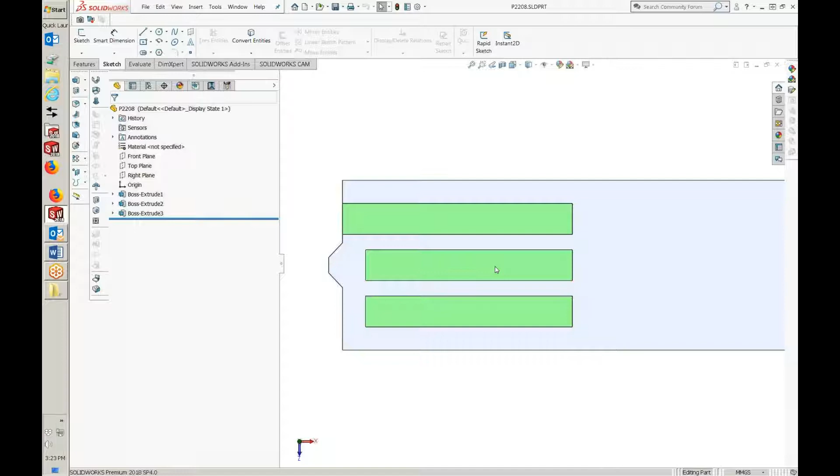Is there any residual solder or plating on that pad? Is that what creates the bond? Is there some sort of plating that bonds into, or are those just two materials that are being put together? Yeah, it is simply the copper. It's the copper to the platinum, and it creates a solid-state bond between the two with a combination of pressure and temperature. Yeah, you're just creating intermetallic by commingling those two materials together. Yes, that is correct.

Okay. Thermode material you settled on? Yes, we're using, can't think of the name of the material right now, but it's moly. Yeah, we're using moly. And I actually designed that up and had one of the few shops that I could find that had a 4,000 wire EDM. I had them make that with wire EDM.

Okay. What capability do you guys have as far as the smallest wire EDM? Wire EDM. We have nothing in-house for wire EDM. Nothing for that size. We don't have wire EDM here, so we'd be outside, so we sub that. Yeah. Okay.

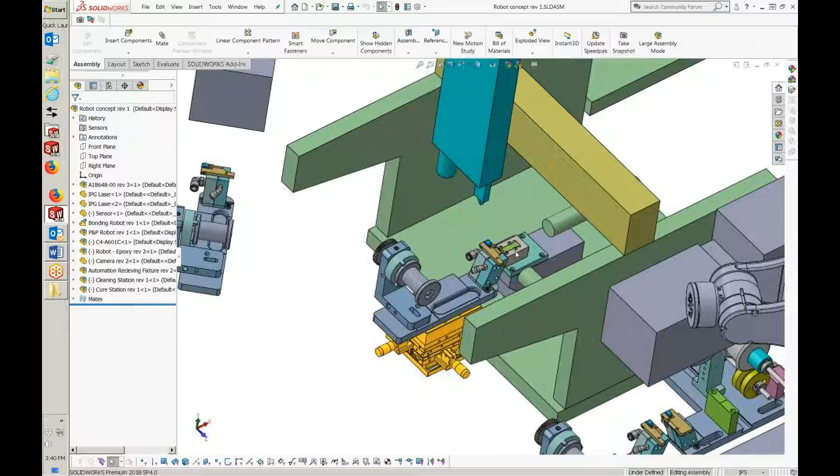It sounds like you're more knowledgeable on the plasma than I have found as well, because everybody I talked to about the plasma, it's a much bigger scale than what this is. Yeah, plasma works fantastic if you can get rid of the gross contamination. Plasma cannot get rid of gross contamination. So if you have any kind of residual oil or anything like that, it has to be nanometers thick for plasma to act on it.

But yeah, we'll tackle the cleaning portion. The RSTG, the Service Technologies Group, that's what they exist for. And I will send you some white papers that show what we've done, not in wafer bonding. I've got some white papers from the EMPF that show what we've done in flip chip bonding and wedge bonding and ball bonding. The pull-off forces are definitely increased tremendously. And of course that equates to long-term stability of the joint over time.

Although this is a disposable device, correct? Yes, although I can't say that 100% because I know there's a lot of different markets they've talked about. So a majority, well, almost 100% that I know of right now, yes, is disposable. Okay, it's not an electrode on a pacemaker that they're leaving inside the body for 10 years at a time. That is correct. It is not. Okay, got it.

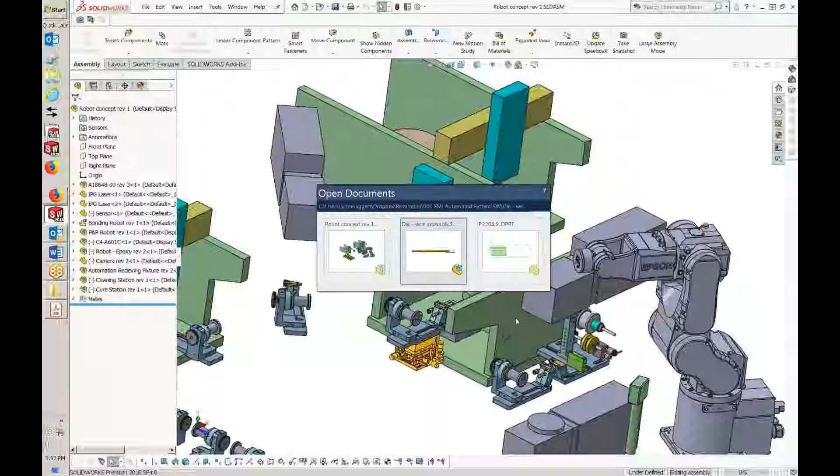Not saying we couldn't do it. It's just those little units that they have, they're molten plastic. So if you require a good deal of pressure to push them through, they accumulate pressure, and then it's very hard to get them to stop. And have you figured out the volumetric equivalent of your dispense shot size? I did some calculations on that quite a while ago. I don't have that at my fingertips. Okay. My dispense guys will ask for that. See if you can dig it out, even if it's approximate. Let me do this. Time pressure. Syringe. Just air powered syringe. So cheap.

Especially when you get a material that won't cure. Although sometimes if you put a UV material under shear, it will cure. Yep. Yeah, like if you run it through an auger and you don't turn it off in time and it just kind of grinds on it on the end, that amount of energy can cause it to cure, just like UV can.

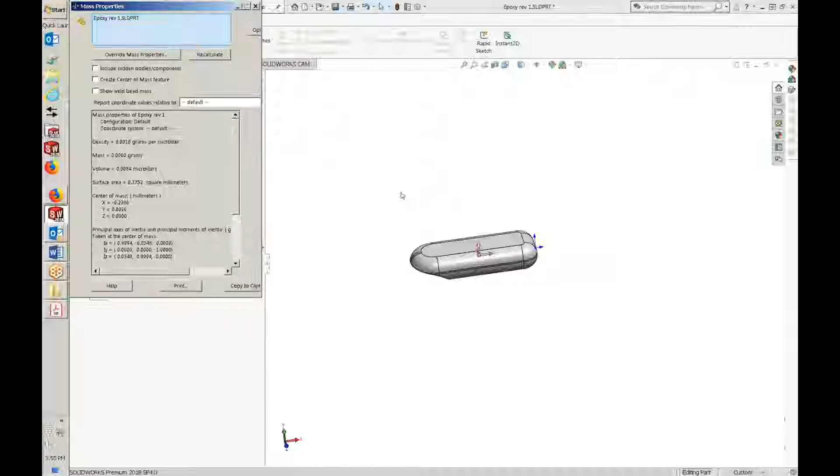Right. Hey, Lynn, after you do your mass calculation here, I see what you're doing. Right there is your microliters. 0.0054, or I can't read it. 0.0094 microliters. All right, so it's under a tenth of a microliter. 0.0094 microliters. Okay. I'm surprised you have that good results with time pressure. You must have a really, really tiny needle on that thing. It is a small needle. I don't remember the gauge right offhand, but yeah. Okay. So, can you bring up the image of your dial table again? Sure. Give me just a minute, and I'll be right back. Yep, no problem.

Hey, Steve. Yes, Brian. Are we fairly well along with the vision conversation? I kind of need to hop on. Yep, you jump out. You go right ahead, no problem. I'll let Lynn know. Okay, very good. Any other questions, get in touch. Thanks. We sure will. Thanks. Yep. Bye-bye. So is he selling? I'm muted.

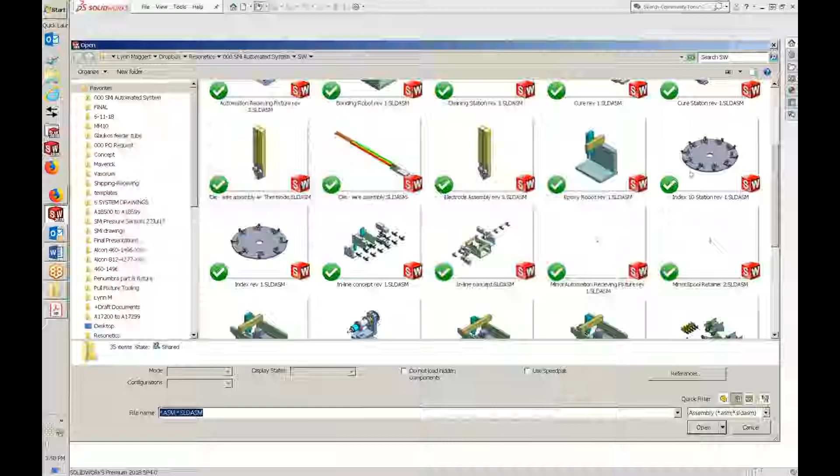In my mind, if you put all your eggs in one basket, there's a lot of things that can stop that machine. We have history with that. We've built significantly complex machines, told the customer right off the top of the bat, you need two. Our system was great, five years before it failed. When it failed, it was an emergency for the next system.

With two systems going, they've been on for 12 years or so, a ridiculous amount of time. One's down for PM, blah blah, but the machine's still running. They lose two or three days, no big deal. Then while you're there, you could PM that machine too.

The one machine can be devastating to people expecting stuff to work when it's critical. With a robust system, it's not as critical, and you could lose a week or two without it mattering. So building a robust system is part of the issue. You build enough redundancy that they don't care if it's down for a month because a part, a system, or a laser might go down.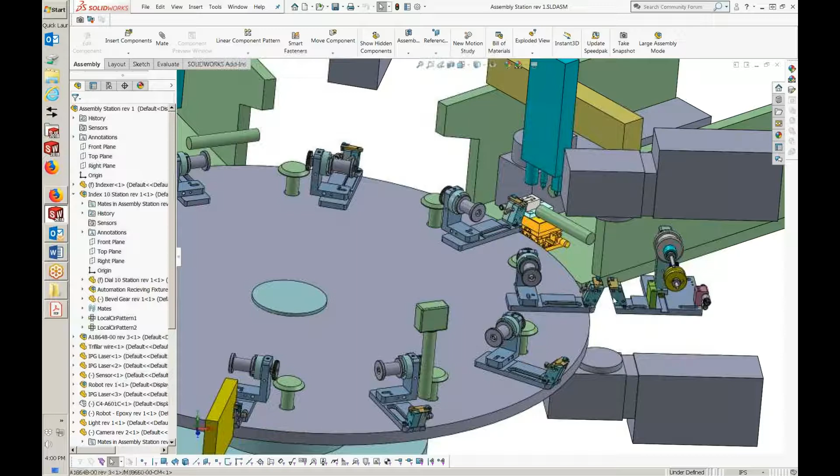If downtime doesn't mean much, then fine, you stay with one system for a period of time until production picks up, or you can see the vision that it's going to pick up. Then you duplicate the system, and by the way, here are the problems or issues we've had. Now you have an upgraded system, probably costing less, but upgraded to what they're doing. And then you have the PMs on that too.

So two schools of thought. It just depends on what downtime means to them, especially from the get-go. And it's a lot easier and more economical to build two out of the box. So there's a lot of schools of thought.

Once your proof of concept has been demonstrated for what I call the high-risk process, then you could definitely go ahead and build system one. Once you're debugged, you can build a second system and debug it much quicker. Yeah, I wouldn't do two at the same time.

I would never build two at the same time, now. But you'd schedule to build them pretty close together. Yes, you'd want to get your materials in, your extra robots, and those things as well.

Yeah, the circle, I have that rectangle. Nah, the circle of the index and dial, I like that. That's kind of cool, and the tool changes. I do know that can be highly repeatable.

When you have the dwell on them, that's the best way to do it, unless you still have to come outside with your cure time. Well, that's why you've got the yellow stations on there, those are your cure time stations. You've got four stations in cure, and if you're at 30 seconds a cycle, you've got two minutes of cure time sitting there. The transfer time can be very fast.

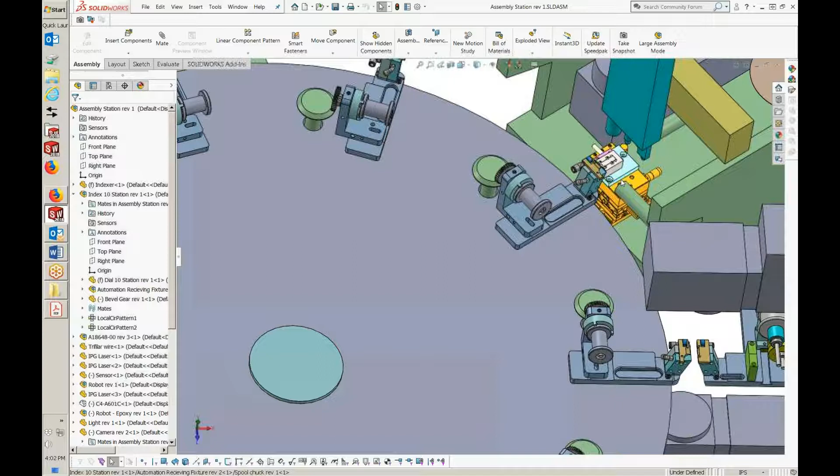It's so sensitive in position that I don't think we can use an index dial to keep it accurate enough just secured on the accuracy of the stage. Well, we wouldn't do it with a cam-driven station. We'd do it with a servo-driven station, and every one of those positions would be encoded.

I'd like to have this conversation with my controls engineer, he's not with me, but if you want to snap a picture of that, I can talk to him tonight and ask what he thinks. And then what about

materials and coefficient of thermal expansion and those kinds of things? I mean, if that's a big aluminum disc, it's going to grow, it's going to shrink, you know. It will.

You're in a clean room that should be environmentally controlled, that should be stable. And if you're running 3 shifts, I'm assuming you've got AC running in there and heat. It should be climate controlled. You've got to test it out outside of the station.

You're testing it here, well yeah, so you can't replicate what you're going to do there. So you have to have material that's not going to drift.

You can still find out. You can use 7075 or something, or use aerospace aluminum, it's a hell of a lot better. You don't want to use anything else - stainless, titanium, Invar, whatever - it's more stable but it's going to cost you an arm and a leg just for the stupid table.

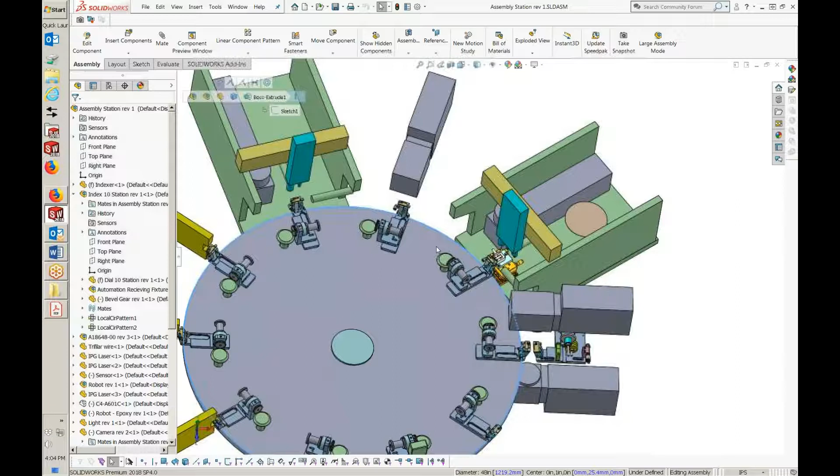But you use the high-end aluminum, it's not going to move. No way - 7,000 series aircraft aluminum? Not going to move. It's already strain relieved and aged, depending on how thick you want to make it. If you make it relatively thick and stable, it's not going to move. If it moves tenths, it would be incredible. Okay good, you agree?

Yeah, I mean I would go back to Jeffrey and say hey, this is what we're thinking, and let him keep it. Yeah, as long as...

...with a lot of metal. Biggest problem is getting the fixtures to repeat on the dial. Mm-hmm, I mean physically mounting them.

You can do that with flags and servo, right? I mean flags and servo, but the problem is the location to location on that dial has to be repeatable within some number that we would calculate. Because as it goes station to station, your stations are fixed. Now yeah, there's adjustments at the station, but your stations are fixed also within some point.

If you've got gross tolerances, it's not a big deal. At the super fine pitch tolerances that you're looking at, it gets interesting. The lift and locate there brings its own set of issues with it. I would agree with that.

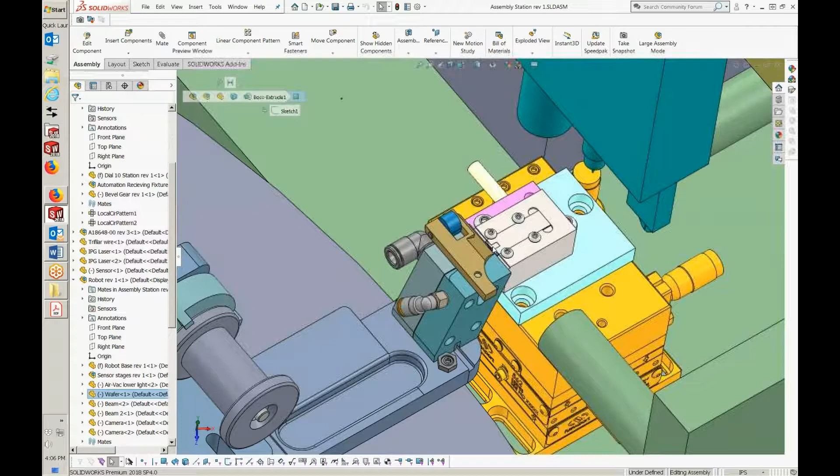Now, I realize there's arguments pro-con on a dial. I know that the way it's concepted here, you've got 10 fixtures, you're going to have variability in all these details. Not that you can't hold tight tolerances, but I'm a bit concerned. Now here it's not nearly as concerning because I can use the vision to find it. Of course, I'm going to have some variability up and down, so I still got to be careful about that.

The cleaning station, depending on what we do, would be great if we can do it right after the bond, so we wouldn't even have that station. Okay, but this is likely the most critical. Now again, with end stations, you're going to have some variability. That's never going to be exactly there.

When you've got a wire that's 1/1000 in diameter and you're 24 inches from the center line plus, you're using this to get your final alignment, and I realize that. It's just there's a set of issues, and like you mentioned, even if we do a lift and locate, yeah, there's a set of issues there.

That's basically what we're doing in the other concept - lifting and locating with a robot. But now, if we do a lift and locate, we could accurately locate it, especially here. That's most critical. Obviously the wire here, we'd have to do that here. Vision, in order to get the right focus, you'd probably have to do it here. You wouldn't have to do it here probably because you just got light carrying. Right, so.

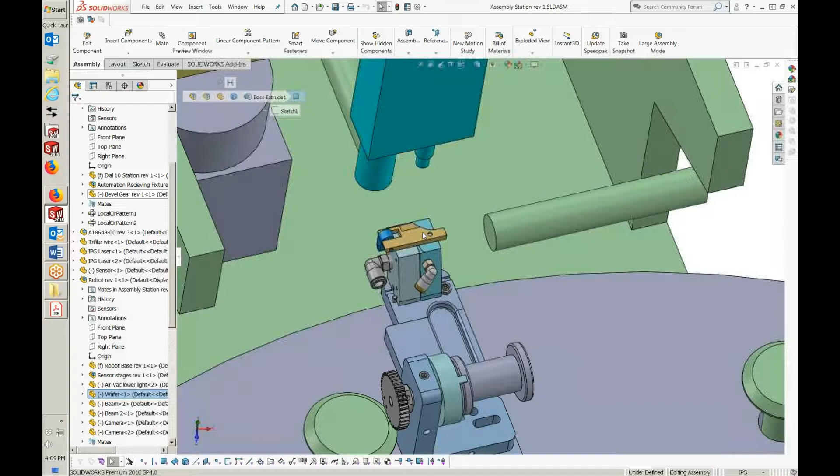We should use vision for the critical locating as much as possible. I know I can put the dispenser on a small SCARA because if I'm within 6 microns of that position, it's not going to matter since the material will wick and flow. It's the die and picking it off the wafer that needs submicron accuracy - that's die bonder world, right?

One of the ideas I kicked around - a granite block, and you just come over top, so your tooling's actually separate. I don't like that idea. This is your deck of cards, right? Your Vegas.

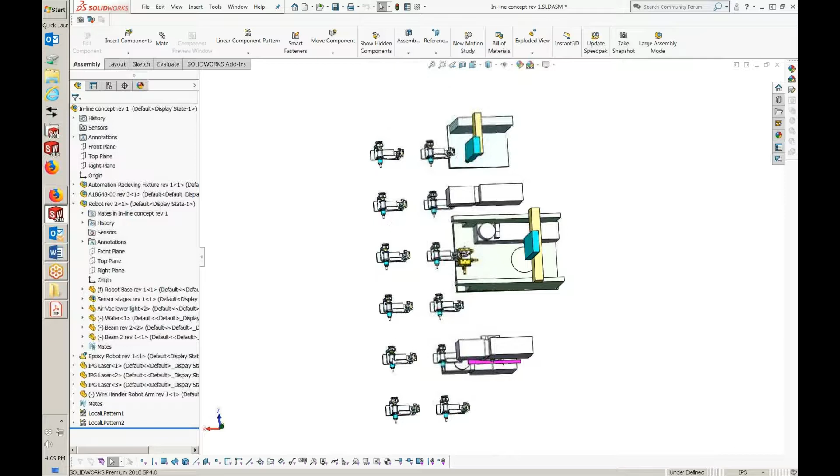Another thing I threw together - if we had a racetrack and you brought them down through here, maybe a precision link conveyor, indexed it forward, shuttled it over, and brought it back. Stelron will do that, just another idea. But you'd still have to swim the part once you get in position. It takes up less room than a dial though. I'm just not smart enough to see the cure stations working in a circle - my brain doesn't work like that.

They'll go in there and cure in the light, then come out, move back to the light. I got that, but you gotta push them into line somehow, and I don't see how. Well, they'll come under a sealed window because of the UV light - it'll swing in, and when it's time to index, the light would retract and the part would move away. It'd be really bad if it didn't retract.

What I would do is get the UV lamps and make myself an arc section where the ones going through are continuously exposed. I don't know how big those lamps are, but I'm picturing something here with your index time. Well, that's the other gotcha - with this design you've got to control your index time because your part is hanging in the air.

If you have a rapid acceleration transfer with your control interval, that mass - since it's unsupported, it's a cantilevered load right now because the wires are supporting the mass of the sensor. As far as the wire hanging out, it's so short because we keep it absolutely short, and it's so light that you'd have to move it at a tremendous acceleration rate.

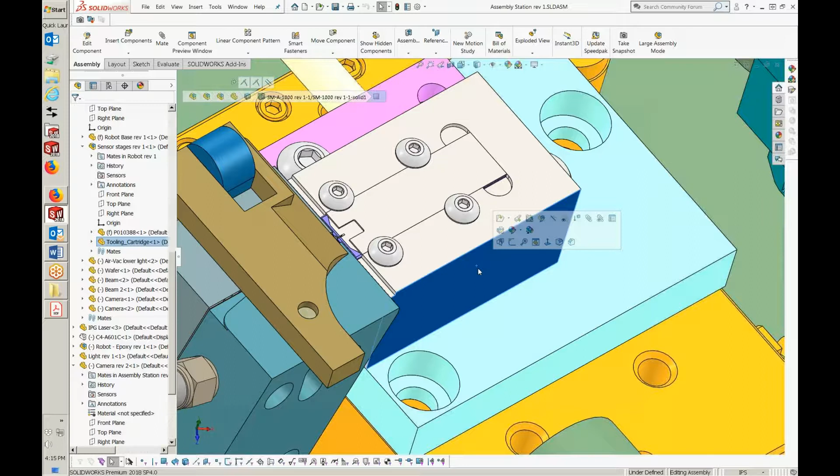So you're saying you could pick into the block and then present the block? Right now, we're moving this block around, and that seems to work quite well. So yes, you could have two of these fixture blocks. So you load it further away from the dial, or further back, and then move that into position. If you did that, you make your area smaller, so your workstation pitch is tighter on your chord length, and that way you can reduce your dial diameter.

You could do one of these. There's a number of different ways to handle that. But if we pulled that in tighter, get rid of all that dead space and dead time, your station is tighter. Pick distance is short. But that's all with time and effort, working on the station. The package dial, the center dial, you've got to work out the ancillary devices out there first to get them optimized before you can lock in on the dial. The tooling works for right now, so assume you deal with that.

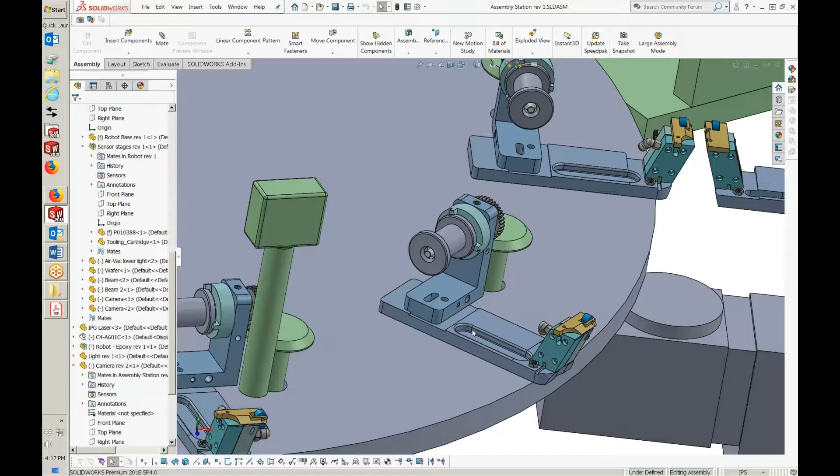You're not showing where you're paying off the long wire here either, are you? I see it now. The feed spool's right there, and I'm winding it up. Now, one thing we haven't talked about, I actually forgot about it, but if it's reasonable, I'd like a robot or whatever to unload and reload a new spool rather than the operator. Yeah, that's easy enough. Put that in the middle? You could. I wouldn't. I'd probably put it beside it.

So your last station needs to be an inspection station, and then you're going to have a packaging station? How many times are we inspecting here? Just once. I show one right here, but I really should do one after the cleaning station if it's incorporated here. We've already got a camera system here. Maybe we can just look at it right after we clean it. We might be able to do the inspection under the optical laser too. Except if we replace that with either CO2 or plasma, and we can do it here while we have that secured, that would be ideal. I don't know if we can take that much time.

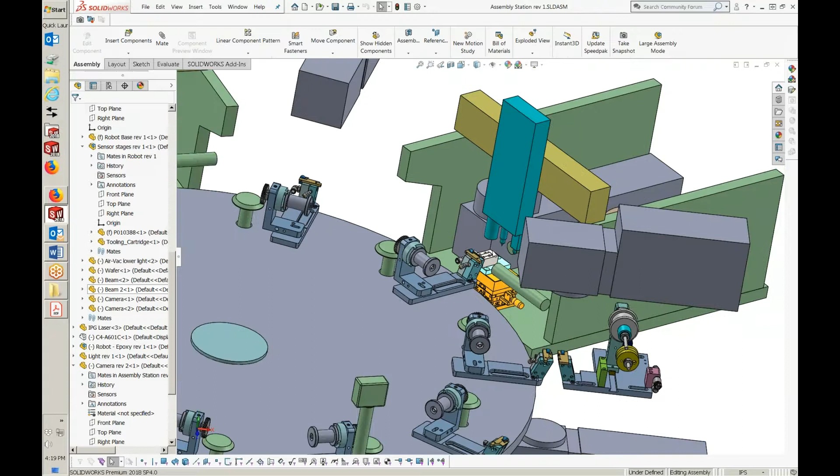That laser cleaning station, that is the next one, has the capability of doing split field optics, so the camera can look where the laser's going to clean. So you can check it if you do it. Now, if you use a different process, I think you can still incorporate vision in either process. I think so. You have some limitations because of the type of lighting you can use because the galvos are in the way. But if you can light up everything externally with off-axis lighting, you might be able to do it, because off-axis lighting doesn't take up a lot of height.

If it turns out that you really got to be up and over top, it's not going to work because you've got all your galvo head and everything else underneath. But as far as inspection, thinking through this, I've already got a camera that I'm aligning this. What if I just snap a picture after I'm done here, and then I snap a picture as well before I do my epoxy, because I got a camera here too. Okay.

You want Lynn to send this to you? Sure. What do you request, a STEP file? SolidWorks. You want to work with it? I can work with it in SolidWorks. Okay. What version of SolidWorks do you have there, Lynn? 2018. 2018 is good. Okay. We're going to give you an email. See if you can send that over. I don't know how big this file is going to be. Do you know how big it is? Can you put it on a drive or something? I can put it on my Dropbox and I can just send you a link to it. Okay. Perfect. Do that.

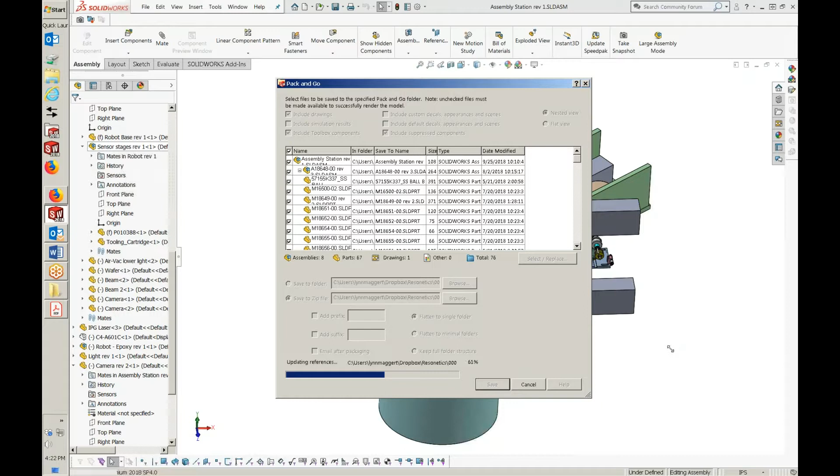Okay. All right. Little bit to digest here. Now, do you want me to send you just this one? I think so. Yeah, that should be fine. No problem. I'll make a pack and go, and I'll put it up there on my Dropbox. Good way to go. I'll tell you what, send me the same link. I'll make sure Chris gets it. I think we might be 2017. I don't know if there's any compatibility issues. I'll check. And this is Steve talking, right? That's me, Steve, yeah.

All right. Next steps. Digestion. Yeah, I agree. Because before we start thinking about monies or anything like that, I need to make sure that we can do this and this makes sense for us, and the concepts and where you build it and all that other good stuff. It's manpower, it's how much time, because I can't absorb them for a full year. So there's other people that we have to get involved and make sure that we're in good shape.

We've already had conversations about this. Now it's a matter of looking at the details and then saying, who do we assign, who can we get, how can we put this together, and does it make sense? Utilization of resources and space and manpower, et cetera. Because you can do a $1 million job and make $30 on it. You can lose money on it. Trust me. And really, more than anything else, what we want is the customer to succeed. That's the most important thing here. It's number one. We're all in agreement on that.

Mike, I know you can hear me even though you're muted. Whatever problem you're having there, I think you can go ahead and stop the recording and send me a link to that later, and I'll make sure Chris has time to go through all these images as well. And then maybe as a next event, after your review and if you're still interested, we'll get Chris over here. He lives in Yardley. We'll sit down, we'll do another discussion on this, and in the meantime, I'm going to look at stages and those kinds of things, just to see if we start to populate a spreadsheet, all the hardware that we're talking